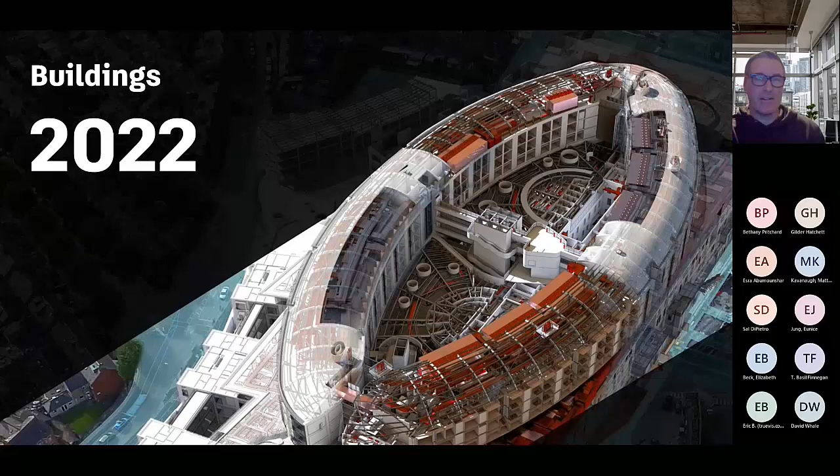How's the lag? Is that okay? I think so, yeah, that was good. That was good on my end.

Okay, so I'll just do a quick who am I. I've actually been in the game for over 25 years. Started CAD back in '96. My student days, there was no Revit, so I did a little bit of work with AutoCAD and our 3ds Max platform. I'm actually originally from New Zealand, where I got to design luxury accommodation up in the North Island.

Most of my career was actually working in the UK, for a company called R&JM Architects. This was an early project I designed, inspired by architect Neil Denari. This is a Sheffield project, a library. I was actually a skateboarder back in my day and subconsciously designed the steps and rails so the local Sheffield skateboarding group could abuse my architecture.

My first foray into building information modeling was on the University of Cambridge. This is a medical research council building we did, heavily serviced, hence why we have these stainless steel shingle clad towers with the extractors housed on the side. When we did this, it was in the early days of Revit. We actually started this one in Autodesk Architectural Desktop. If anybody's used that, I think it's now called AutoCAD Architecture.

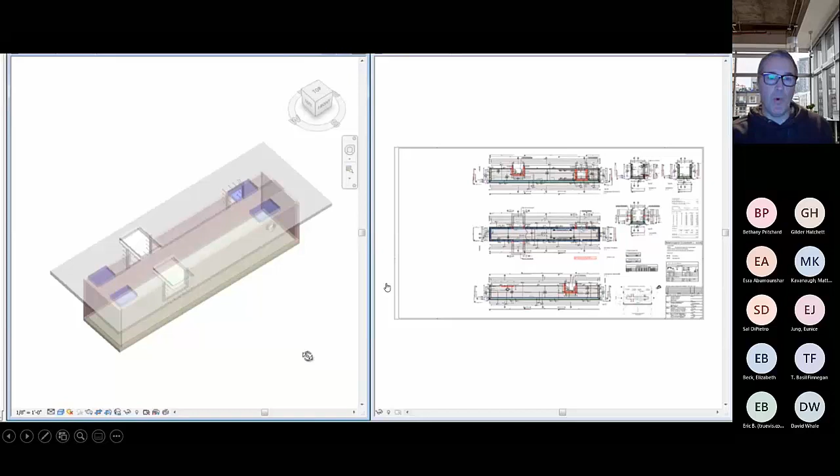What happened when it got to the final construction documentation is the contractor, BAM, rebuilt the whole thing in Revit. This is a quick video just showing the detail because it's a heavily serviced laboratory. All of the components are actually modeled for mechanical and electrical, so they can use that for facilities management.

This video we showed a few years back. This was just showing some of the displaced parts that you can do in Revit to better show the assembly of the laboratory tables here.

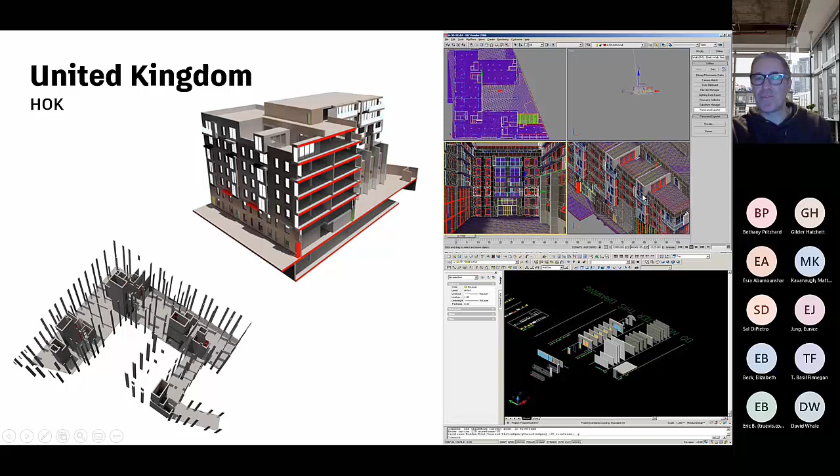I also worked for HOK for a short period of time. One building that I did the conceptual design on was the Baku Flame Towers. It got handed over to another team who developed this in Revit. At the same time, when I was a BIM manager at HOK in London, there was still the crossover between Revit and ADT, and then linking it into the older 3D Studio Viz platform.

Before leaving the UK, I was fortunate enough to work on a design for manufacturing and assembly project. This is a large, complex healthcare project in Brighton, on the south coast of the UK. We worked with Laing O'Rourke contractors where the components here, the precast concrete panels, were actually modeled all in Revit.

This is back in 2010, where we didn't have divided parts or the concrete add-in. We actually hosted these within a curtain wall, and each one of these panels, they're exported as an IFC, and then Laing O'Rourke used them to fabricate these panels for assembly on site.

I'm also very passionate about sustainable design. I've done some competitions in the UK. My claim to fame at Autodesk is I got to design the sample house, so every time you open the product, you'll see the sample house. This is the original design, so a little bit different from the one that ships with the product. But yeah, fortunate enough to be able to be creative.

And I'm a regular speaker at the Autodesk University events. I did a formal one a number of years ago, InfraWorks for Architects. We did like a thing remodeling Sydney, a VR one in 2017. And then the last one before the lockdowns was with Willow, where we were doing some digital twins workflows on Forge.

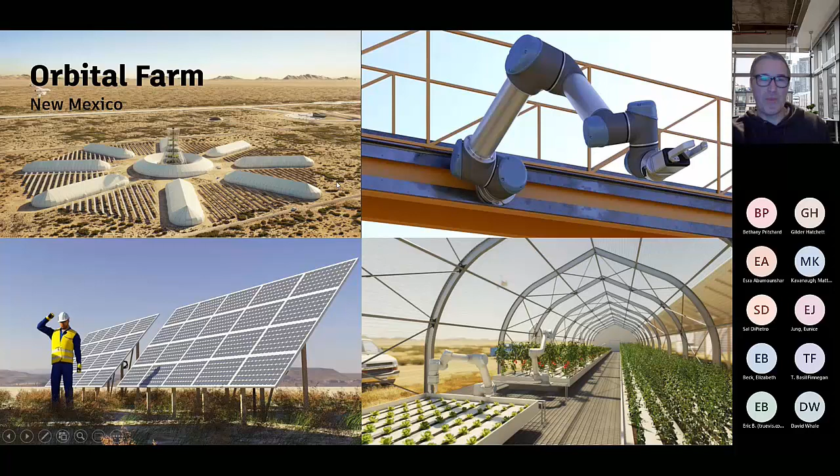Okay, so I won't go into this full presentation, that was just a quick intro. Today's presentation will be on conceptual design, focusing on Formit. If you have any questions, feel free to drop me a note, my email's there.

I decided not to show something that I would typically do. I thought, well, let's try and do something local to you guys. I found this building in Charlottesville, and I thought it would be a cool one to model in Formit. I'll keep this loose, so if you have any questions, please reach out, just feel free to ask. I'll try and jump between the platform, but I want to do the overview first and then come back and show some of the picks and clicks.

One thing I got hit with yesterday was Bing Maps went down and I couldn't fully use the tool. But I wanted to show some of the tools you can use that we've been adding to Formit to create 3D context. This is part of the APIs, the plugins, so you can load in numerous plugins or build your own.

This one that I thought was quite cool allows you to choose a location and build the city. With the tool here in Formit, I'm just going to try and move my controls out of the way. This is always the challenge of doing stuff remotely, as you get the tools in the way of the product.

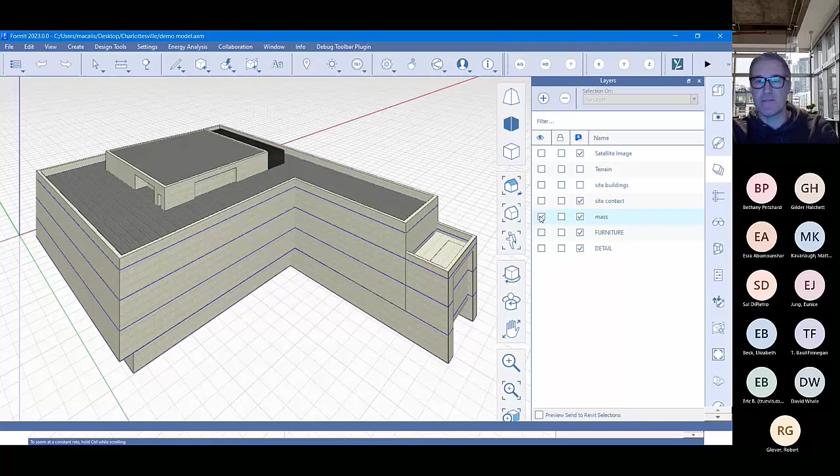So what we have here is, I'll just turn off some bits and pieces. We actually have the site buildings and the satellite image showing up, and let's just turn off the terrain. So this is the satellite image I've pulled down for this particular site, and it's going to be jumping around a little bit on me. I did do this a lot bigger, but I just wanted to reduce it to give me a bit of context.

The tool we have to capture all of this is up here, this is the location setting, powered by Bing Maps. I had a little bit of a challenge yesterday, but basically with this tool, you can pick a location anywhere in the world. This little red dot just shows the location of your site.

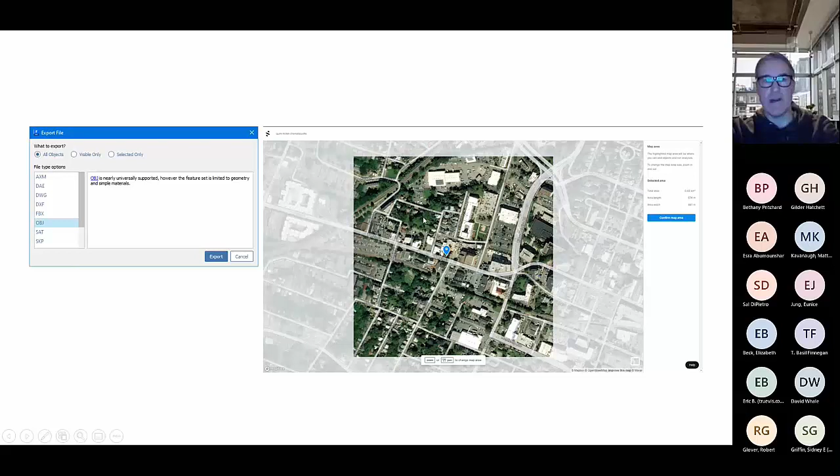So I'm just centering on the site, and you can pull down a lot of info here. One thing to note is that if you do a much larger site, it won't be as detailed or fine-tuned in terms of the aerial overlay. So make sure you're choosing a smaller amount, but you can pull down a lot of information, satellite image and terrain, or you can just set the location only if you don't use that information.

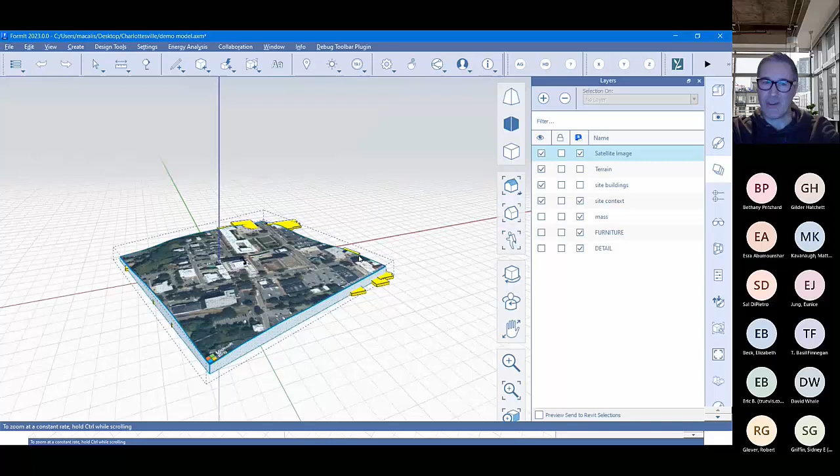What you'll find here is when you turn on the terrain, this is OSM data, so OpenStreetMap's data, which is kind of okay, but it's not really as accurate as what you want to be using. So it does put that automatically on a layer when you're pulling down site information.

The other tool we have here for building the context, as I'm panning down the list, this is the 3D context creator, and you can go up to 1,000 square meters, referencing our northings and eastings, our longitude and latitude. Now I won't do this live, because if I go and do it, it'll take a few minutes, but you can pull down a lot of information here. And here is the data I got from that 1,000 square meter block.

What I actually did was jump into Spacemaker, one of our new platforms, because Bing Maps wasn't working in FormIt yesterday. But I wanted to show that if you're creating sites or want to connect to other platforms, FormIt does export numerous file formats. So if you want to import or export SketchUp files, it will do that.

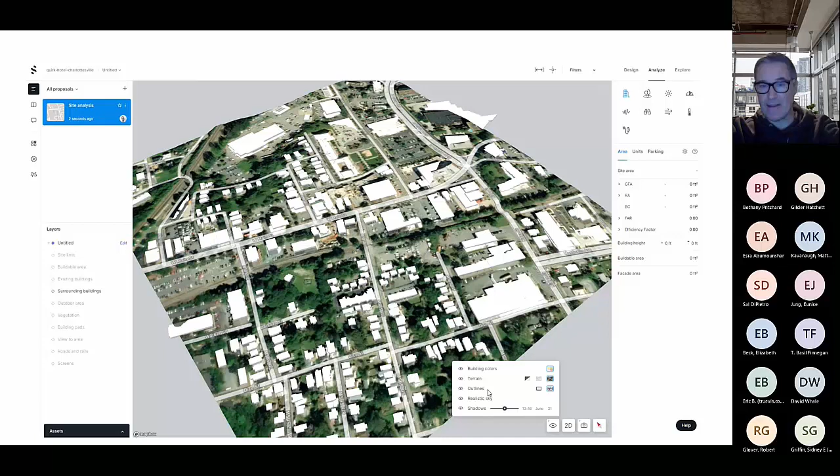OBJ is one of the key ones that works with our new Spacemaker tool. So I did the same thing, created a site in Spacemaker, and went through the process of looking at the OSM data here. This is what it creates for the site: you get street information, the aerial map, OSM data for the building, and aerial information. We're adding more and more features to this tool, like realistic sky and building outlines.

What I was doing here was looking at how I could combine the FormIt data in the Spacemaker model. So this here on the right is actually the FormIt data pulled down from this 3D context creator. It actually did probably a better job than what the Spacemaker tool was pulling down from OSM. This is a whole other session on Spacemaker, which we could do at another time, but at the moment it's geared up for Northern Europe because of its origins out of Norway, out of Oslo.

So it's all about the databases, how you can bring in other data to use in these platforms to create your site context. There are new tools allowing you to optimize the data before bringing it in. What's kind of cool is this FormIt data I'm bringing into Spacemaker actually starts to break down the levels as well. You can set a story height, split the model, simplify the model, crunch some of those vertices. There are tools here to help you optimize the data you're bringing into the Spacemaker platform.

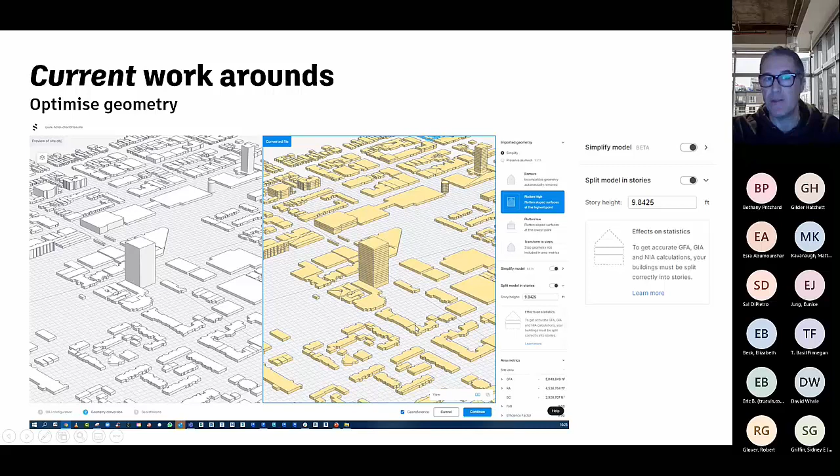Now, one of the challenges we have is aligning those databases, because at the moment we don't have all the world coordinate systems inputted into the program yet. We're going to be accelerating that, but it's just not there yet. For me, being down in Australia, we use the map grid of Australia, and there's a whole northing and easting system to get familiar with. You can find some workarounds to do this.

One of the tools I prefer to use is 3ds Max, which is in the AEC collection. So if you have a collection, one of the workarounds I was looking at is exporting terrain data out of Spacemaker, bringing the FormIt data and the Spacemaker data into 3ds Max, and then aligning the information together in the X, Y, and Z values. These are some workarounds. It can get a little complex, and I don't want to overwhelm anybody.

I think we have a question. I was trying to find the right moment to interrupt you. Yeah.

I just wanted some clarification in terms of the OSM files you were importing through FormIt versus Spacemaker. Does the FormIt 3D create or site generator still extract information from OpenStreetMaps? If so, why is it different on both platforms?

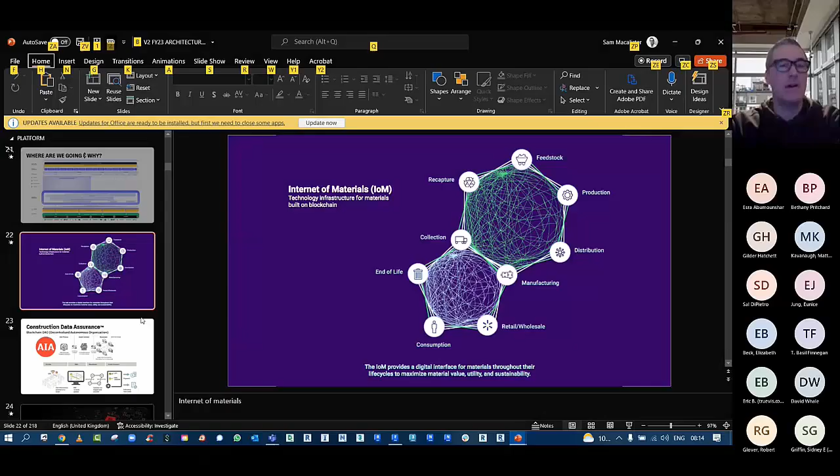We have a connection of FormIt in Lumion, and I didn't have time to prepare this yesterday, but I have done this for a site in Singapore. Lumion has a beta version of an OSM connector to create a site, and this is what you can do in Lumion—you can link FormIt into the Lumion environment for visualization. Their tool does up to 2,000 square meters, so you can bring in a bigger site, but it's reading OSM data. You can see the data here is really sharp; you can't export it out, but their data seems to be better.

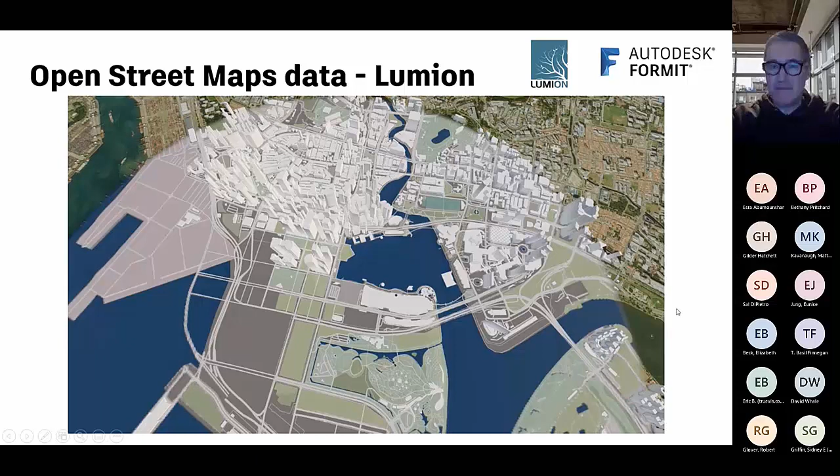I don't know why their data is better, because it says that it is pulling it from OpenStreetMaps. Our tools are pulling it from OpenStreetMaps as well.

Yeah, but I don't have the answer for that, even I'd be curious.

We've been testing early pilots for Autodesk Spacemaker to give feedback. We ended up staying away from OSM and trying to bring in GIS data to help mitigate some of this. That's a challenge because I work in the APAC region, and we don't have the database available for the platform yet since it's still very new to Autodesk. So my workaround was to actually bring in data from another source and load this into Spacemaker.

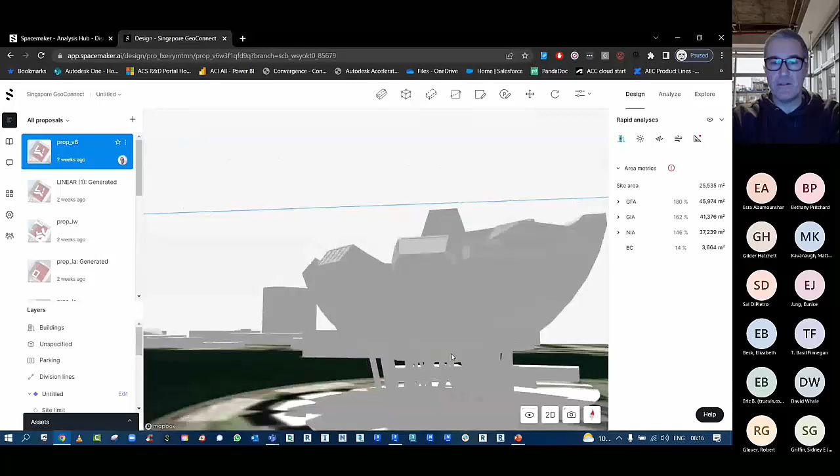So here's Singapore. I've optimized the files a bit because this is a cloud-hosted platform, but you can get a decent amount of detail that's acceptable to use in the platform, and you can start to see different features in real time. This is the tools we have to start designing your buildings, like an LOD type environment where you can manipulate it all. You can test and analyze sun and noise, and there's a wind wake tool.

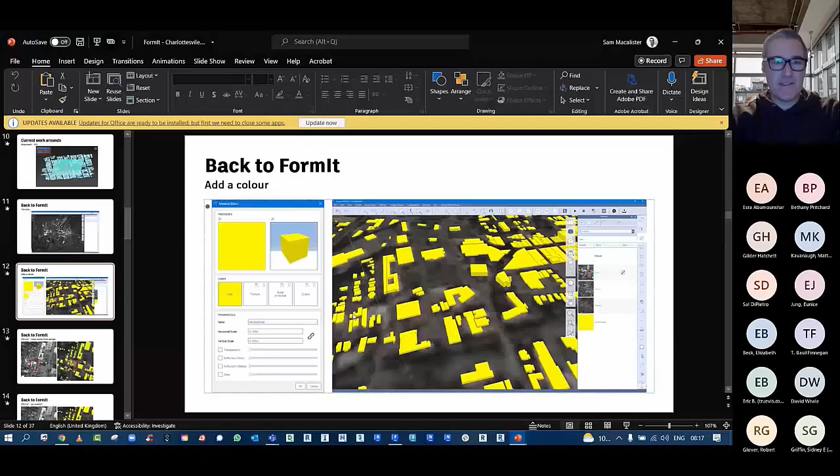This is new, still in beta, and it connects to Revit - I'll maybe show some of that at the end. There's a lot of really cool things happening here, and I've got something set up for Charlottesville as well, where I've been able to bring in assets from Formit to host them in a Spacemaker site. I'll come back to that, but the challenge is always where do you get the data from, how do you align it, and how do you work with real-world coordinates.

Here we have the challenge that Australia is divided up into several different states - not 50, but I think we've got about 6. The coordinate systems change in various states. Over in Western Australia they've just updated it to a 2020 coordinate system, whereas the east coast of Australia is working to what's called a GDA 94 system. So there's a lot of complexity there, and it's always good to work with a surveyor or a civil engineer to understand the right coordinate system for setting up these types of city projects.

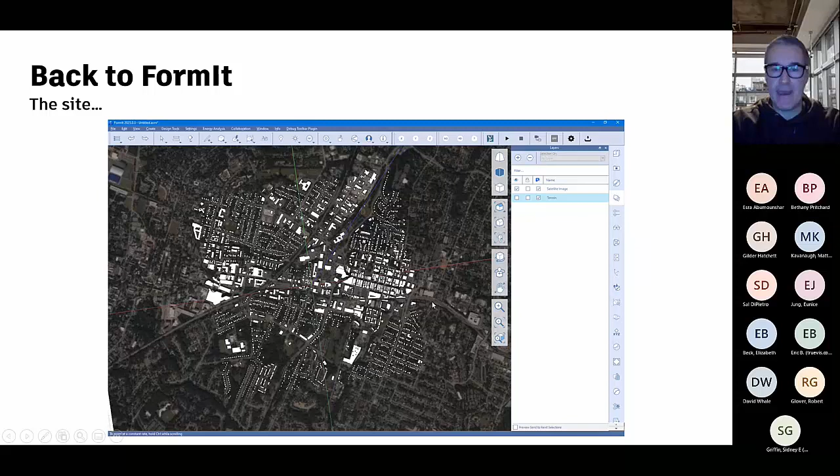This is just what I built in Formit. So back to Formit - I sort of went off into a bit of Spacemaker there, just wanted to show some of the newer tools coming through. You can do up to 1,000 square meters of that site, and then have that big map aerial image in the background. What I try to do is color code everything. Materials are really simple - you just create a color or material you want, bring in your own textures, bump maps, or cutouts for alpha channels, adjust the horizontal or vertical scales like a UVW map, add different types of reflections and gloss to make them look nice and shiny, and apply them to any bit of geometry in the model.

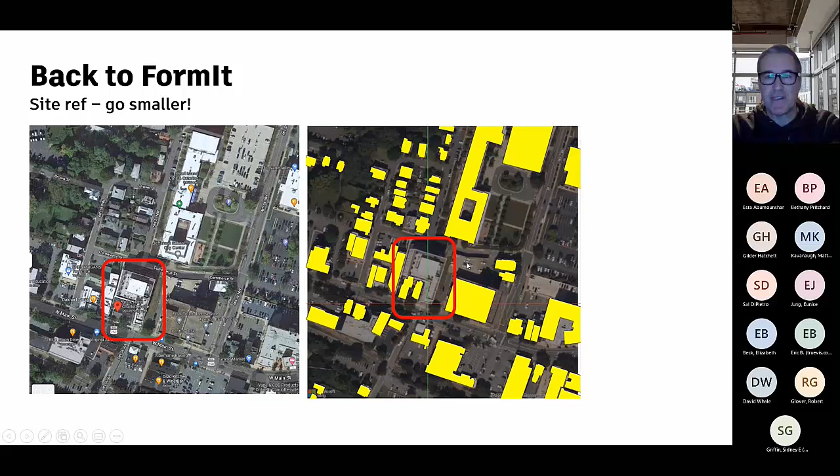What I did note here is if you want a nice crisp image like you would in Google, you don't want to pull down the whole site - you want to get a bit closer with a smaller site, and you'll start to get more fidelity in your aerial image. For this one, this is by an architecture firm - I don't know if anybody from the group works for that company, but I saw this building was new and thought it would be a good example to try and replicate in Formit.

This is some other things you can do to increase the detail on the site. If you're familiar with the Revit kid, he's increasing his YouTube presence with a site called BIM After Dark. Check out this Google Earth 3D trick - he shows how you can use Autodesk Recap Pro to capture site information and export it for use in Revit, Formit, or Spacemaker. It's an interesting workflow - if you've used Recap or photogrammetry or point clouds, photogrammetry is essentially drone footage of a building. It captures photographs and stitches them together, using intelligence to look at the images and triangulate them together, and if it's not too sunny a day, it will create a 3D model for you.

So with Recap Pro, you get Recap Photo. You could take up to, I think it's up to 1,000 photos. There may be a limitation on that, but you can take these photos, you pan around this in Google Earth, you record the screen, the video can be extracted via Adobe Premiere into separate photos, like 400 photos.

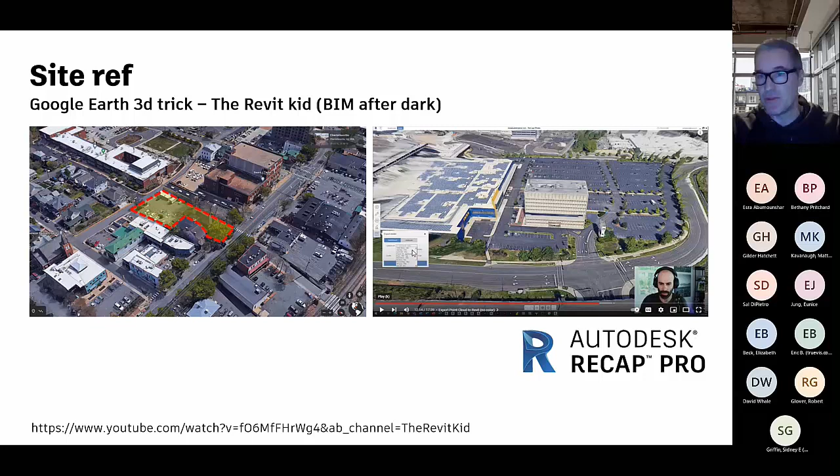You upload them to Recap Pro and it will create a 3D model for you. And I just screen grabbed this one shot. There's numerous different file formats you can export out. So again, if you're wanting to add more detail around the site, this is a really cool video workflow to check out. And again, part of the Autodesk AEC collection, you get Autodesk Recap Pro to do this. The only caveat here is it will consume cloud credits, so just check the consumption of your cloud credits before committing to the conversion.

Okay, so quick start, massing modeling. It's simple, it's very intuitive. This one was just looking at massing up the site and grouping them.

So back in the actual tool here, I'll just move my screen controls out the way a little bit. Typically when you go and model things, you'll want to try and put them on layers. I've been pretty lazy about putting stuff on layers, but it just helps you monitor all the information. Let me just turn off these ones, side buildings.

Typical rule of thumb is you can use these modeling tools up here. I prefer the pencil tool. It is just point and shoot. Oh yeah, and the units, I work in metric, but by default it will work to imperial here.

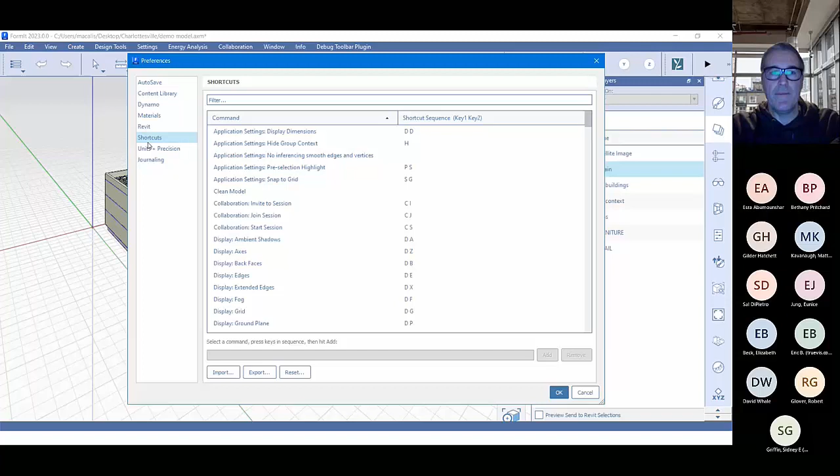In the background, there are more settings for you to look at here. So your shortcuts, if you like to use hotkeys, won't talk about Revit just yet. Material locations, I'm actually pointing my materials to my 3ds Max database, but you could point it to your Revit database.

Dynamo, which we'll get into, you can add like a Dynamo library location. So if you've got someone in your company who uses Dynamo and has a whole lot of scripts you want to use in Formit, you can do that. And then content library as well. You can reuse all your Revit families here to be loaded into Formit as well.

So just a couple of things in the back end. But it is a very intuitive tool. So it's just point and shoot, and you can basically type in the sizes you want. It gives you the little highlight for the XYZ gizmos, and as you go to finish up the command, it will show you it closing. So here we have our

2D component, and then we just extrude it up. And again, I'm working in meters, but it's as simple as that. And then with that selected, I would double click and then hit G to group it. That just helps preventing solids merging into each other and just helps with better management.

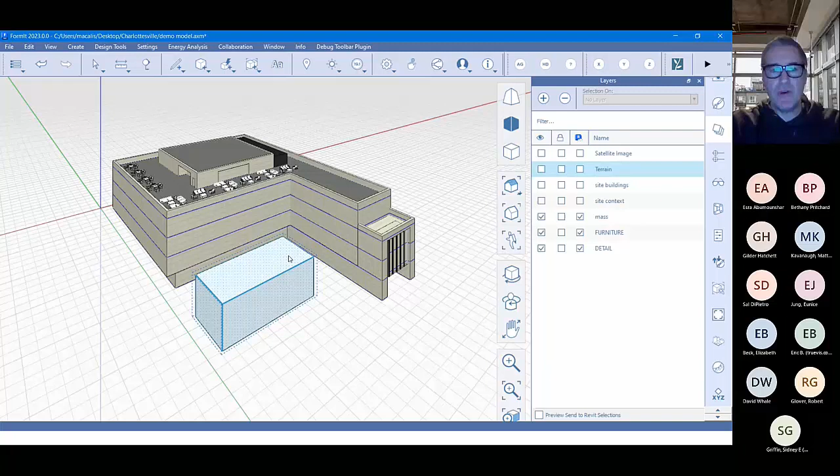So what I have for each one of these is they're just grouped objects, and that just helps me better manage the model. When you go to double click, of course, the group opens up, and you can grab edges and then move them down. And again, I just need to make sure I'm doing this slowly and doing it following the Z axis here.

So maybe I want to slope that down, say 3 meters. I can do that. I can also go and grab points, and I can bring that point up, say 3 meters, if I want to do something a bit more interesting with that shape.

So simple modeling tools. There are a few more advanced modeling tools here. So there's a couple of Boolean and join operations. If you've used sweeps, I think we were talking about landscape architecture here before. If you wanted to do a curb, for example, it could be like a square with a chamfered edge. You could draw a spline and then sweep that curve along the spline.

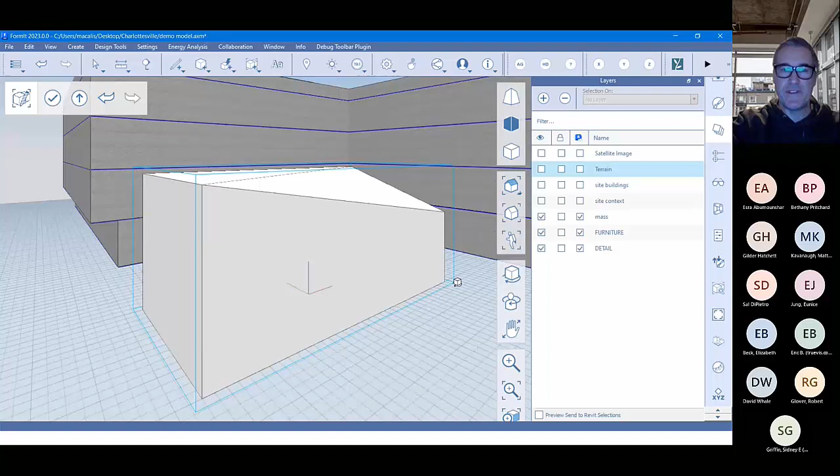Tools here to close up edges. So let's say I've deleted that face, for example. I could go and use this tool, and it will ask me to select the edge to be enclosed. So you're just delineating over the top of that, and then you finish the command, and that will clean that up again. In fact, it's done a little bit of a different type of a junction here. You also have a lofting tool.

So if you ever wanted to do something interesting, like maybe you've got a twisting tower, and the floor plates are twisting, or you want to be more organic, you could loft options, and you can do offsets of solids. So if you want to create internal parts for the walls, you can offset it maybe 200 mil, 300 mil. You can shell objects, and then there's a nice little one for doing fillets if you want to chamfer everything, because there are no corners in real life. So if you want to get really accurate, you can do that.

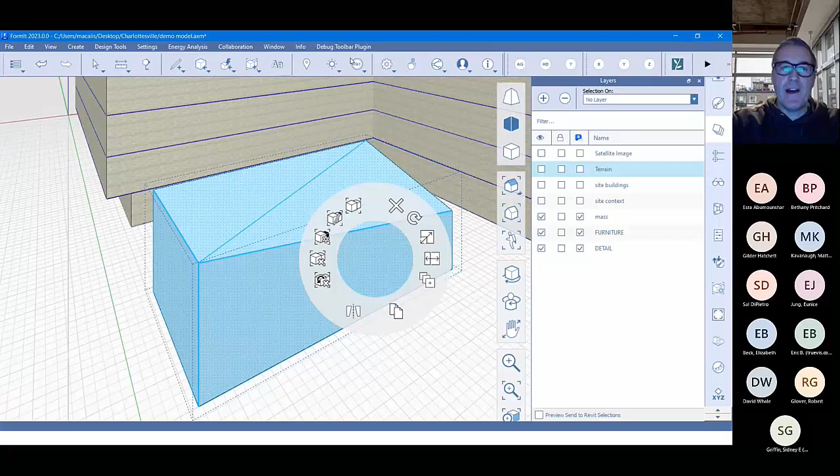Typical tools for grouping. Again, if you right-click, you'll find the tools available here. We also have mirror tools, copy, of course you can go Control-C, Control-V, array, non-uniform scales, rotate, and delete. And a little one we just added, if you want to have 3D text, this is actually a Dynamo tool.

So I could do 3D text on the building here. This is actually a Dynamo script, so it's simple, it's easy to use. So I'll start rugs, and we have some embedded fonts available here. Maybe not all the fonts, but probably some decent amount, and you can use this to increase, decrease, extrude the scripts.

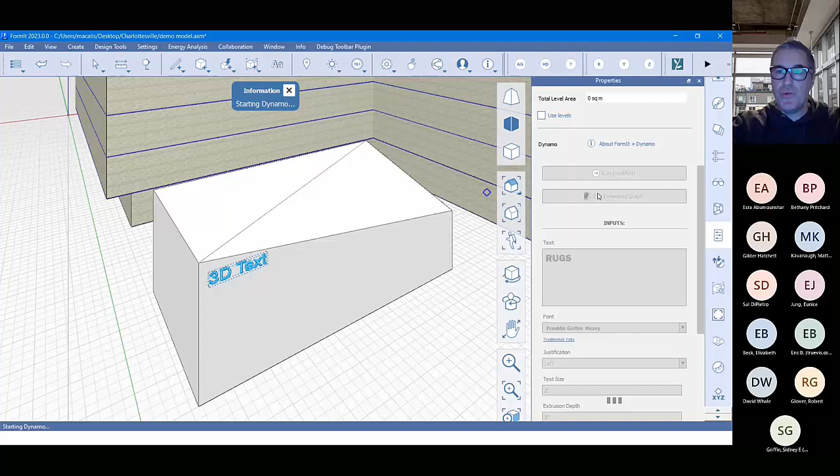If you want to customize the Dynamo scripts, you can also edit the embedded graph, and this will fire up Dynamo. So the whole idea is that we're making this easy for someone to leverage the Dynamo script inside of Formit, but you don't have to be a Dynamo expert.

Here, when we go to the actual script, there's a bit going on, a lot of nodes and wires here. You could work with a partner of Autodesk, or someone in your company doing this a lot of the time, and they could customize these type of scripts for your business. Here we just have the nodes and wires, and then you have the actual 3D text, so you can start to see the actual result of that script working inside of Dynamo.

But I'll move out of Dynamo for a second. So these are all the simple tools. Couple of things to look at.

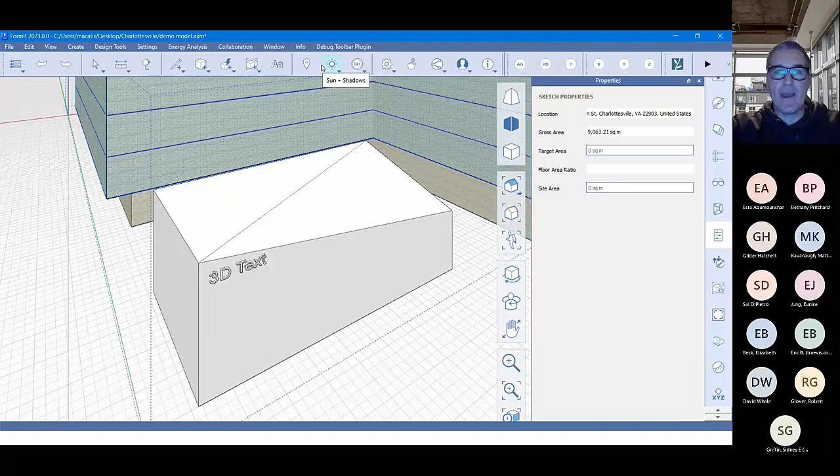We do have a shadow and sun editor, so you can turn on your shadows and your sun editor here and start to see the azimuth and altitude of the sun. So that will be showing for you.

And we do have a solar analysis tool. Now, this is actually leveraging the weather station. Now, this is telling me that this isn't available, and this is because I set this up using Bing Maps yesterday, which wasn't available for me. I think it might have been just down because of my location in the world.

It has an option to look at the range for a certain time of the year. So summertime for you guys, but maybe you want to look at the sun in January, you can do that, or you can look at it for the entire year. So if I just do just for that month, you can choose the entire project if you want, and it will do the entire project, or you can just choose certain faces.

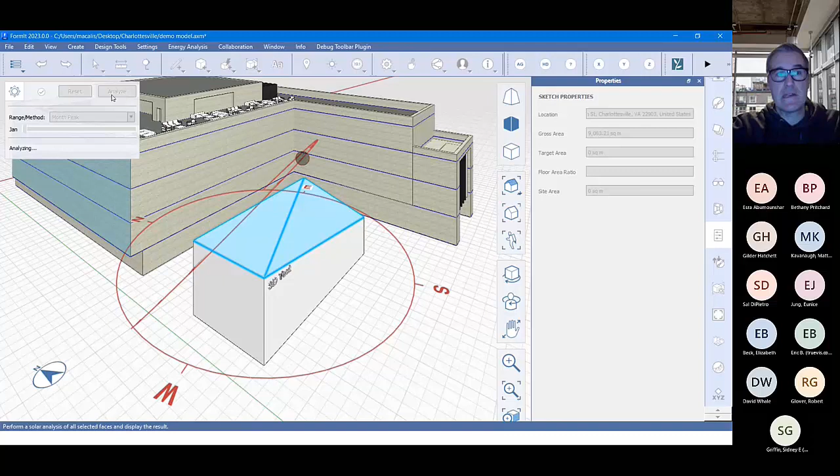So I'll just grab those two and go analyze, and this will now give us some information on the wattage per square meter or per square foot, and it has picked up the location of this being on West Main Street. And when you hover over it, it will start to tell you more information about how much wattage is going to generate, wattage per hour. So nice little simple tools like that to give you some quick feedback on your conceptual model.

And when I go out of that, that is gone. I won't get too much into this one. This is the Insight tool. This is more for doing basic conceptual options with some of the components in the model. This probably works a bit better in Revit. I wouldn't necessarily use this one in Formit. You can test it, but I think the Insight tool works better with the Revit environment.

Okay, I'll just pause. Any questions at the moment?

Okay, so I've gone through basic modeling, some of the tools you can use to get into a bit more detail. And so what I did with modeling up this building is...

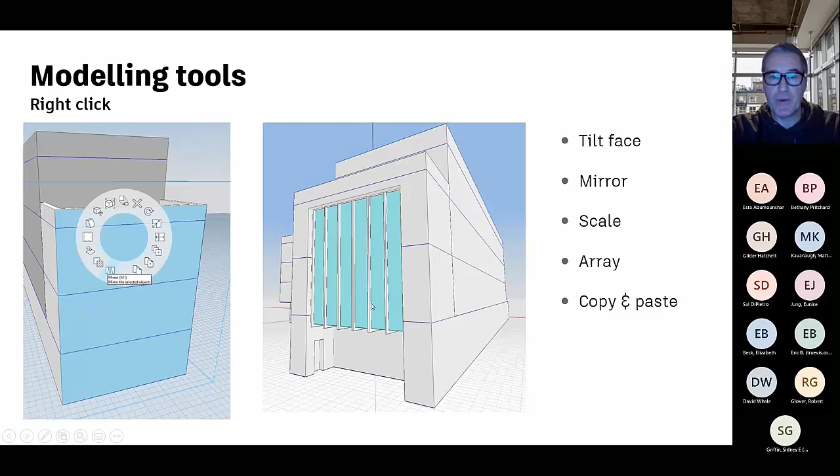I just had one comment in terms of the Dynamo you just showed. I know Dynamo for Formit has a little bit different nodes to push geometry versus Revit.

So whoever is using Dynamo on a Revit side, just keep that in mind. Yes, good point. So when we do go into Dynamo here and use one of these tools, you'll notice when we fire up the Dynamo engine that it will show Formit information. So you can't use the same scripts inside of Formit as you can inside of Revit.

Quick tools we have here. I'll just use the panel grid. So I can select that panel grid. I can start to use some of these inputs.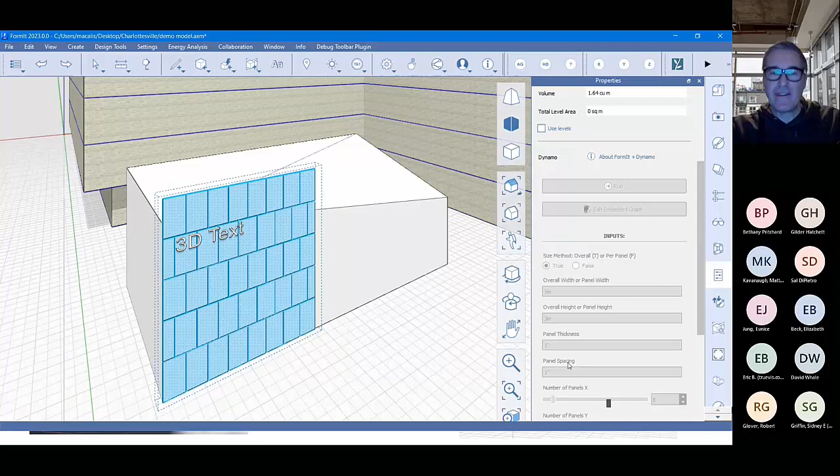One of the things I like here is, although it defaults to imperial, I can change this to meters. So the panel width, if I want these to be say 5 meters, I can type M at the end, and it will acknowledge that this has actually changed, and it will make the adjustments to the panels. I'll probably do something a little funky here because I haven't changed everything, but this is kind of cool - I can use metric and imperial to drive that Dynamo script.

And as mentioned, when we go to run that embedded graph, you'll see that this relates to Formit as opposed to Revit. So it was showing that these are Formit nodes in here. Good point to raise there.

Materials - we work with bump maps and normal maps. If you've ever wanted to use a tool to create a normal map, you can do this in Photoshop, or you can potentially work with a bump map and a cutout as well. It's really simple, just point and shoot.

So even with that panel work here, we've just got our paintbrush. You can work with the material samples. We have numerous ones out of the box, or you can path your own library - I'm actually pathing to my more advanced 3ds Max library.

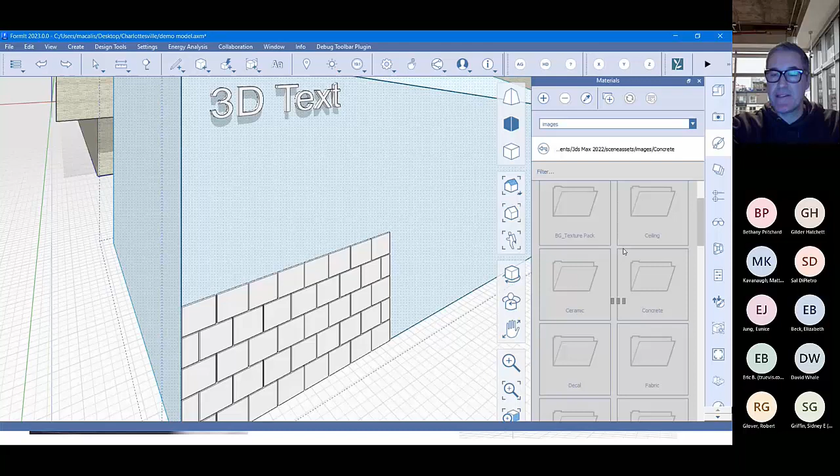And if I go to my concrete image database, I do have a lot of detail here. I'm probably going to be pushing the limits of the tool because these are really high-res images, so maybe I might roll back to the earlier one.

Okay, I'm just going to pause and jump back just so you see what's going on. So I can quickly configure the horizontal vertical scales, the reflections, change the mapping as needed, and then just paint that onto the entire bit of geometry or the material face.

There's also some mirror ones here as well. So painting onto the glass here, I use mirror glass, and there's a rough HDRI background image here - that's why you're seeing a little reflection of trees in a field in the background. Let's see - here it is, so it's loaded up.

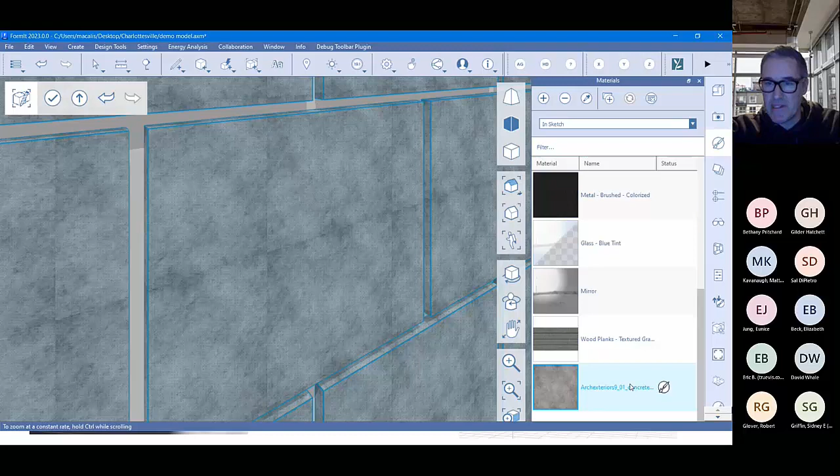So here I can go and just paint that onto that material, and you can see it's coming pretty clean. If I want to make adjustments, I can right click and go edit material, and I want to increase the horizontal vertical scale. The width and height of the panels were like 5x3, so I could go 5 by 3, and you can see it's adjusting in real time, and I can get some nice materials here.

Other things, just so you can see what's happening with this - you can also add more reflection, and as you crank this up, you'll be able to see some of this in the viewport here. This is the HDRI that's actually hidden in the background, reflecting here, but you can see it in the preview.

Also like in Revit, you can lock that as well. So here we have that background - looks like we're on a beach somewhere. So that's just a little nice thing to show real-time reflections for those panels.

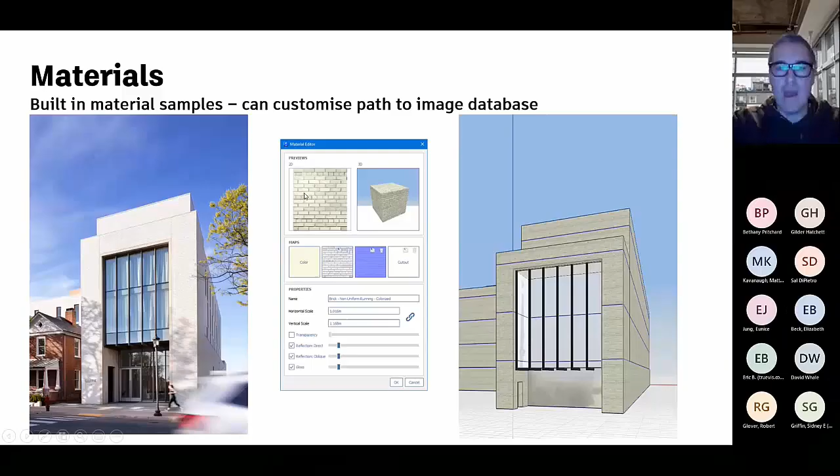The Revit connection - you can bring in your Revit family. So what I have up here is your content library. Now this doesn't necessarily have to be Revit files - you could consider looking at other files. This one, I have it mapped to numerous locations.

I can also map it to the cloud. So I have Autodesk docs here, and I'm going to see if I can start to connect it into BIM 360 here. I haven't got this one mapped just yet, but what I have here within my libraries is the ability to drag and drop in Revit files.

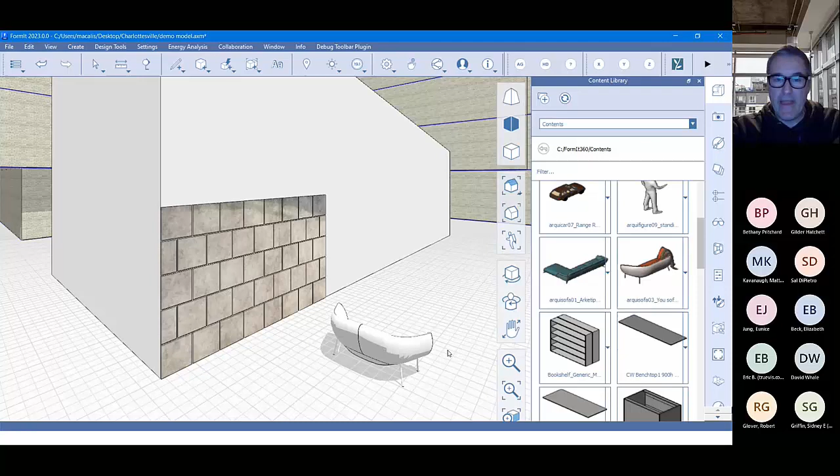Now, some of them, depending on how they were made, will show in different ways. This one's from a company called Arketipo, so it looks really good in Revit, but when you bring it into Formit, it drops down to the coarse level of detail. If I want to bring in something like a kitchen, I can bring in this Fisher and Paykel oven, and that detail is available.

Now, when it does clip like this, just go to perspective views. Okay, so I can't get too close, but you can see there's a lot of detail in this model. Now, it's not a family in the sense that it's going to have all the information like a typical RFA. It's a bit of geometry, but it's a way to reuse your Revit families here, and these can be edited should you want to.

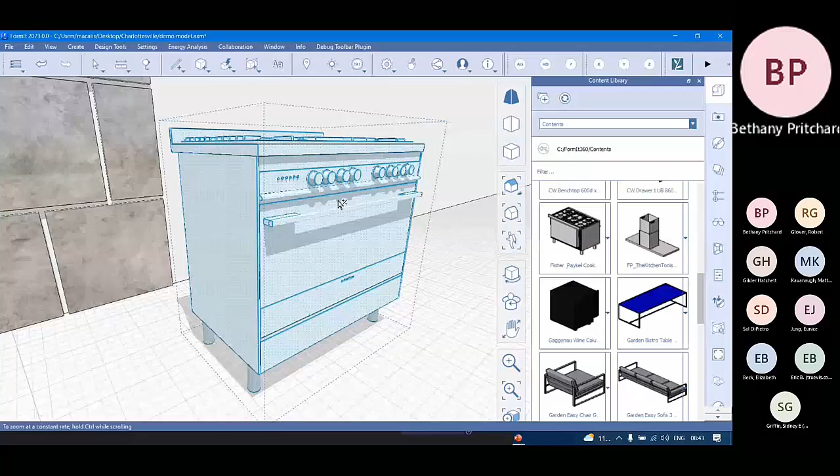But it doesn't have the same sort of depth as, say, a typical Revit family. So you can manipulate this if you want to, and I'll just pull that out. That can all be done, but it is just a bit of geometry, so it's not going to be a Revit family in the same sense as a Revit family. And when you go back into Revit, this won't convert back into an RFA.

I'm wondering about that family, where you're saying when you go back to Revit, it can be converted back to an RFA. But what if there's a modification? Because I'm trying to think this through. No, so...

It doesn't convert back. It is reusing the Revit database, the Revit families for Formit, but when you bring it back into Revit, it doesn't convert back into an RFA.

Okay, so it's not really the same family — if you loaded the same family into Formit and into Revit, it wouldn't have the same characteristics, it just converts. Okay, yeah, so probably the thing to note here...

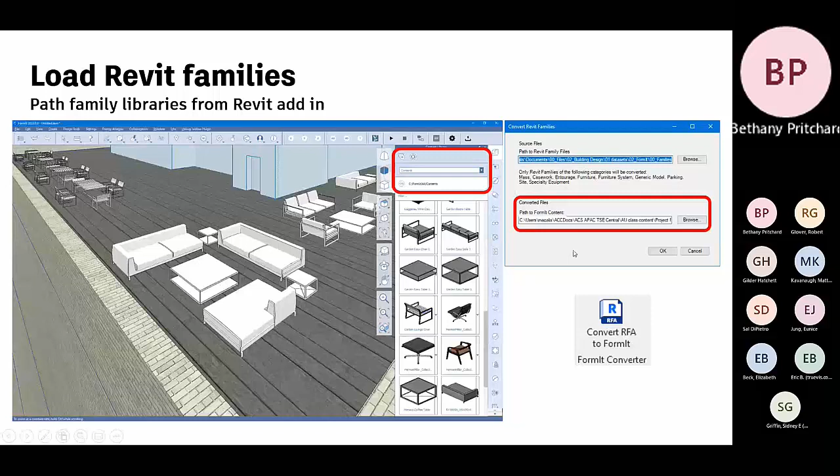Is you want to be modeling in Formit to a basic level of detail and then converting and developing in Revit. So just with Revit 2023, it's bringing through some data, but it's not going to bring through everything. It's not going to automatically convert everything just because of the way the two tools work.

I'll just cover a couple of things before going into Revit. For any of us architects who like to have things look a certain way, we do have visual styles in the tool. And this is just in Revit 2022, 2023 — we have the ability to bring in the AXM file as an import. In 2023, you can link it. In 2022, you can import it.

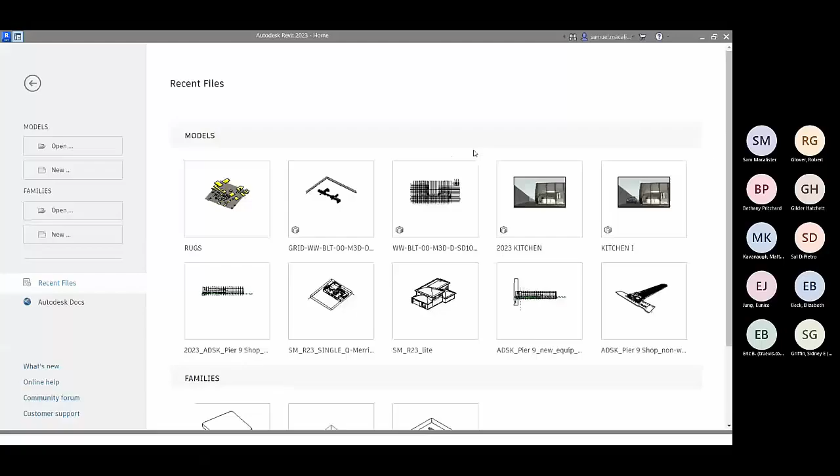So what we have here in Revit, this is just the site. I won't go through the process of doing it all instantly — just don't want to suck up too much time. But here I have a link of that Formit model coming into Revit. So it is an AXM file format, but it's linked like a CAD file format. There is the ability to send that back or edit it back in Formit if you want to.

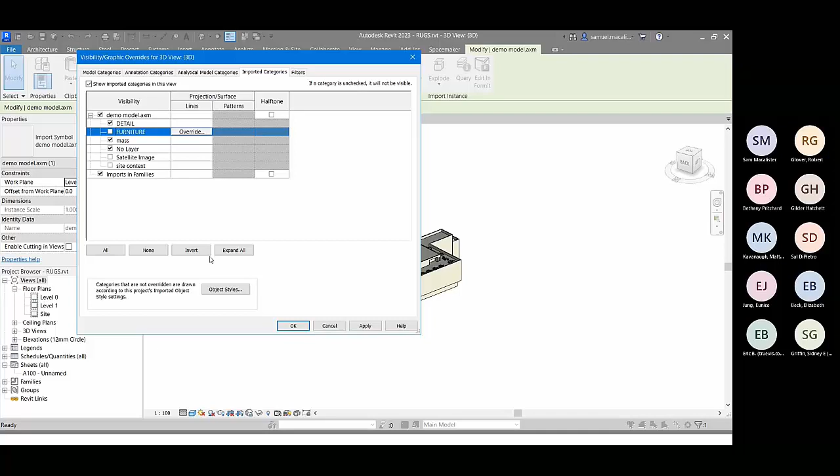So you could go back and edit that. Here it's pinned. You can query some of the layers. And again, I've done a very basic job of creating layers here, but there is some information here. When you go to your visibility graphics and go to imported categories, this information is available here as well. So if I want to turn off some of that site information, I can do that, and the furniture, I can do that as well.

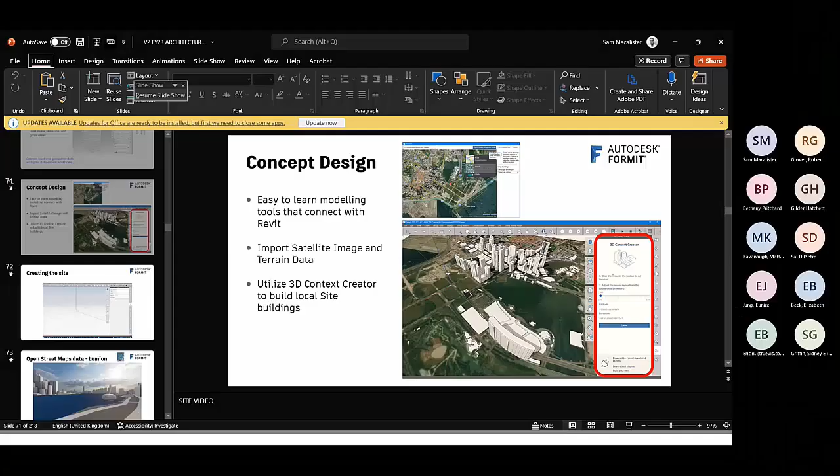And now I have what would be the basic of a massing model to start working on, and you can see some levels. The levels haven't come through in this one. In the 2022 version, you can bring it through with the levels, but because it's 2023, it's a little bit new — it's not bringing through the levels in this instance. But in this part here, just to show you a quick demo where it does have some levels.

For anybody who's an Enscape user, we don't have a plugin for Enscape, but we do have Lumion. This is just a quick example of a Formit model linked into Lumion using one of their demo sites. I can get some quite good results without having to do too much work, and again it's all going to depend on the power of your PC, your graphics card, your CPU.

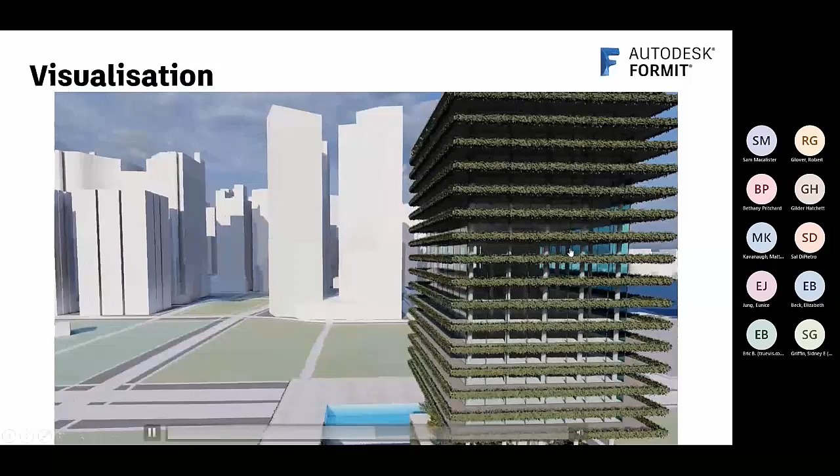A slightly larger model here, this one looking at that city context. This was a tower in Singapore with a lot of foliage. If you've ever used trees and planting in a model, it can be really taxing on the processing power of your PC, but this is just looking at linking that Formit model into Lumion and showing it within context.

The one we have here for the levels - this is the imported one in Revit 2022, and my levels do come through. It's just the new 2023 one, because it's linked, that's not doing that.

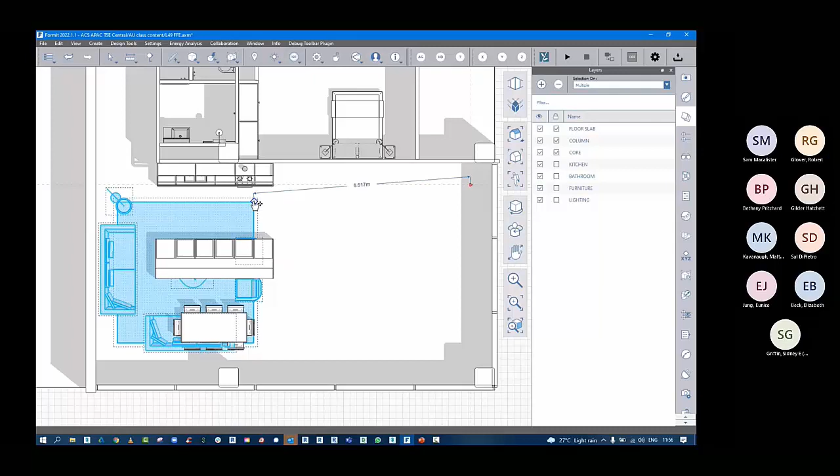A workflow that was of interest to one of my customers in this part of the world was having a connection between Formit and Revit, to have different teams collaborating within a Revit model but have the Formit team doing their own thing. This one is the Formit environment where we have, say, someone doing a fit-out of an apartment - an interior designer - maybe they don't want to be using Revit, it's not really needed for what they're doing. They can be working in Formit with the Revit families, and that design can be linked into the shell and core.

So this is level 49 of an apartment building in Singapore. This can be linked in at level 49, and that can be part of the shell and core of the Revit model. So it's a collaborative design workflow - not a fully connected BIM workflow, because the Formit data is Formit data and Revit data is Revit data, but that's one way you might want to consider using the tool.

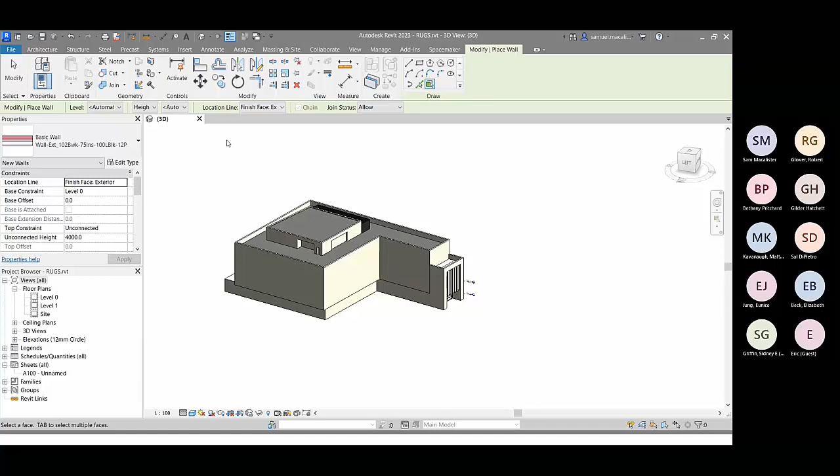Here, back in Revit, it is a massing object. Typically if you want to convert these into Revit information, you would use the mass by face tool. It looks like here I might need to make some adjustments to actually leverage that tool in the new 2023, so I might need to import it and then start to use that tool. So that's where it's at in terms of bringing it across into Revit and connecting back - but it is still bringing in a massing model as opposed to a detailed model.

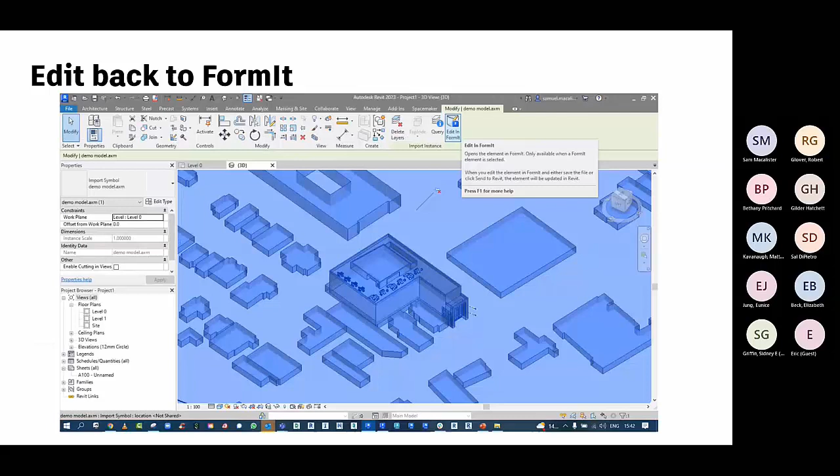I'll come back to that in a second and show you some of the new stuff you can do with the Spacemaker platform, which is really impressive. Other things you can do - the data doesn't have to be used just for Revit. You can use it as an FBX, OBJ, DAE, or SAT.

In this instance, I'm actually bringing it into Spacemaker. I can bring that in, and I can even locate it by its northings and eastings - a little bit of tweaking here. I know that's not the coordinate system for Virginia, but I've moved it to the correct northings, eastings, and vertical Z placement. We can bring it into the site, delete some of the information that's on the site, and then place that building in context.

This is still very, very new, and for anybody wanting to use Spacemaker, it's available for a 30-day trial. It's not fully rolled out in America yet - it will be soon, it's just not fully there.

With that Formit data, I can now start to assign it to a building type. So that particular level could be a living unit, or I could put on a core, or add it to retail or residential. There's a lot of really interesting things happening with the connection between our conceptual design tool Formit and our new cloud-hosted platform Spacemaker.

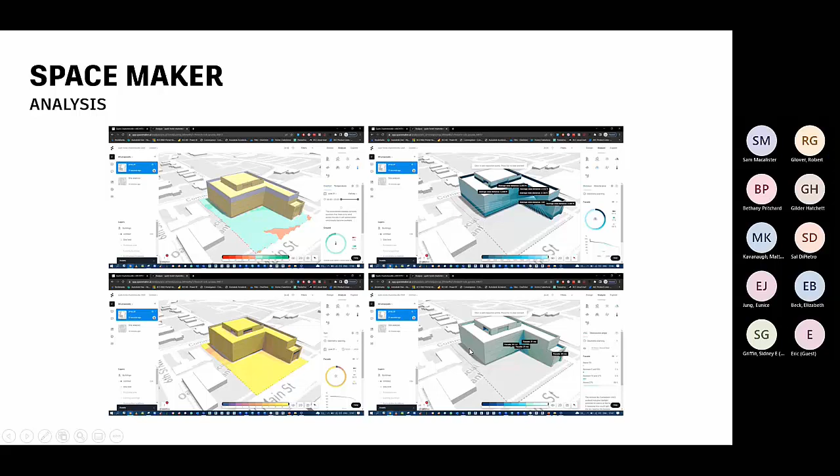There's analysis as well - tools for doing noise analysis, daylight analysis. There's a little microclimate tool here if you want to measure the heat within a courtyard in a hot part of the day. There's a view analysis one, which we'll get into in a second. There's even a wind wake analysis, and there's also a connection to send that data into Revit, which I'll try and show towards the end.

Just checking how we're doing for time - I know I've probably gone a little bit long.

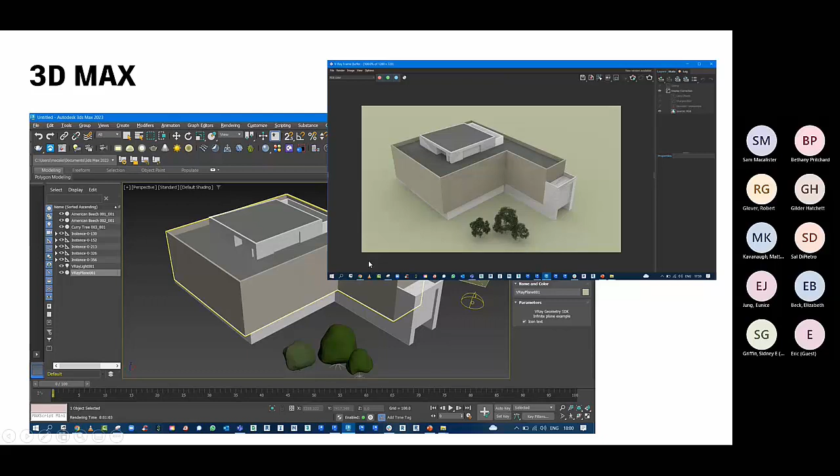This data can also go into 3ds Max, and you can reuse that data. The materials from Formit have come through, and I was just using the V-Ray engine to put some trees in and start adding context. I know most people using Revit will be using Enscape, Twinmotion, or Lumion. I'm from the old school days, I still love 3ds Max, but you can still re-leverage that data. So let's jump into this and show how we can start to do a bit more with the newer conceptual design tools.

Any last questions on Formit before I load up some stuff here?

I'm not sure if you were going to get to this, but it would be great to see information brought into Revit, manipulated in Revit, pushed back into Formit, and that back and forth. That's what I've heard Formit is able to do. I'm not sure if you have time to do that, or if you have to import it instead of linking it.

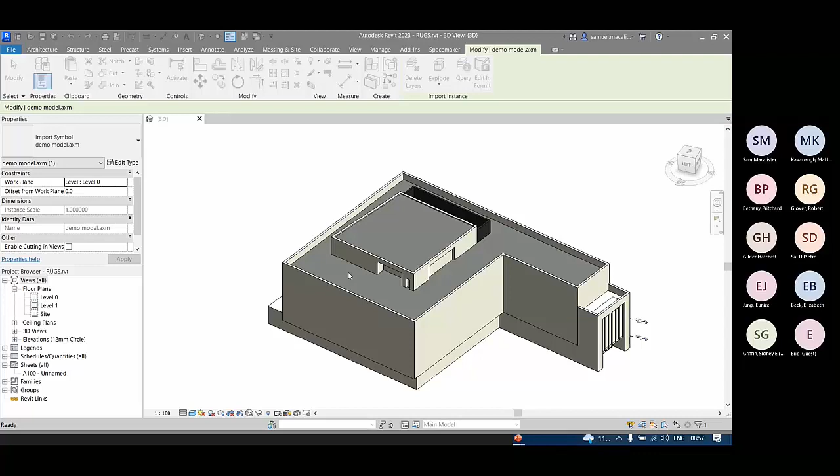From what I've seen, it needs to be imported. Whenever we bring out new tools, not everything is fine-tuned. If I just go and do a new project using an architectural template, the linking option doesn't allow me to do anything, but if I go to Insert — and I know we should not be importing, we should always link data — if I do an import of an AXM file, this one now gives me the option to bring in the levels from Formit, and I've done shared coordinates.

I'll touch on shared coordinates in the new tool in a second. Now when we go to our 3D view, it's actually brought in the levels I created inside Formit, whereas the previous linked one just had the default Revit views, and I could maximize all of these out, etc.

Now with this one, if I want to do more with it, what you want to be doing is using wall by face, but at the moment it's not giving me the option to select that massing object. So I'll turn off the detail of the furniture.

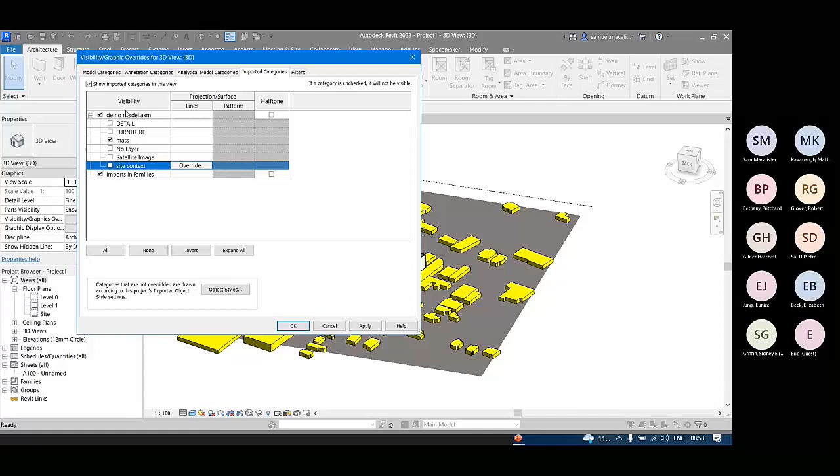What you need to do here — I'm going to do a partial explode, and this can sometimes be messy. Okay, that's done it. The partial explode has broken that down a little, and I would then go to use wall by face, but it doesn't seem to be liking it. You might need to go to full explode. No — so yeah, it isn't a perfect workflow, especially with certain types of geometry.

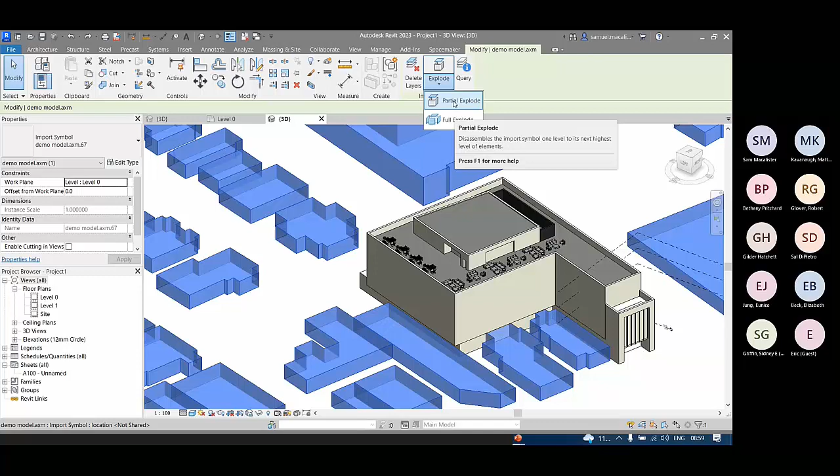Perhaps with simpler massing geometry it might work a bit better, but the way it reads this, it's not liking it. So the connection of bringing data from Formit isn't going to be seamless in terms of having a model that's 100% ready to work in Revit. I'd keep it very, very basic — that's always going to be the challenge.

Because in Formit or a tool like SketchUp, we want to be able to model something like this — my goal was to have something like this as a conceptual design model. But to reuse this type of data inside Revit, as you can see, it's not going to work perfectly. You probably need to consider how detailed you model it before bringing it in and using wall by face.

What I will show, though, is a much better tool for doing this. I'm just going to close out this project and do a whole new architectural template to show you where we're going now with these new tools, and what it actually converts to automatically without having to do wall by mass by face.

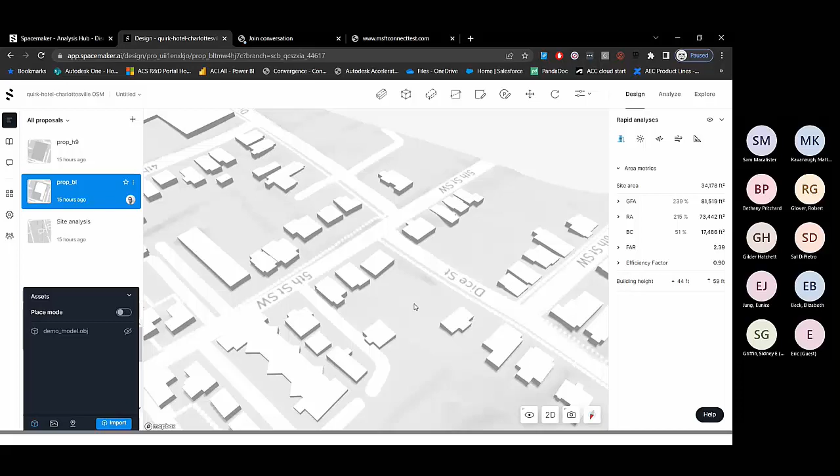So here inside the new Spacemaker tool, you can bring in different assets as needed. I did bring in the Formit model, and I have that data available in the proposals. Where is it on the site? Here it is — I've got to get used to my different keys for this tool.

You actually have to use the shift key and the right click button to pan, as opposed to the mouse.

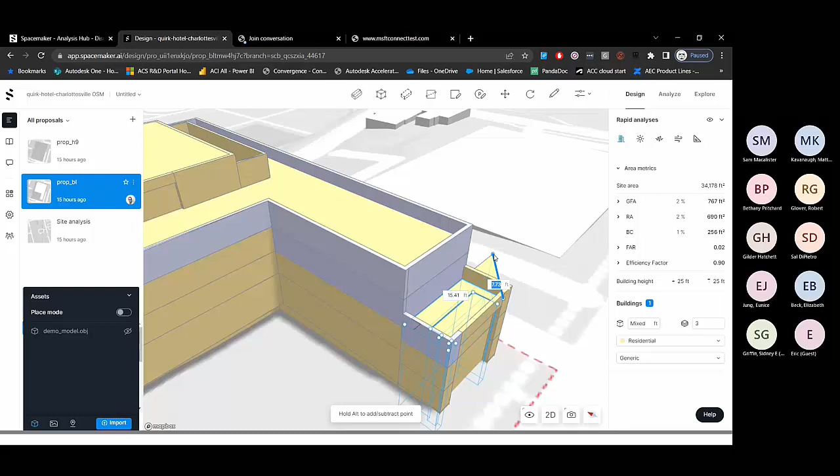Here's my Formit model inside of Spacemaker, and you can see how it has come into the platform. There are some things you can start to do with this. Again, this is very early days, but you could start to customize these elements. Now, this might be a little bit too detailed for Spacemaker, but I can use that information and potentially manipulate it if I wanted to.

Now, I won't do that. I want to just show some of the newer tools. So I've got a new proposal here to create a new proposal plus. With this new proposal, when I fire that up, it just gives me a clean site here.

Some of the things I've done in the background under the layers here is you can go to the edit tool and set up more intelligent information for your site constraints. There's things like bringing in your own terrain, should you want to. So here, this is the OSM data, and I don't know how hilly this part of the site is, but maybe it's not as hilly as that. OSM data is like the DEM data. You can bring in your own terrain file. The other workaround I've been looking at is exporting the terrain as an OBJ and then aligning it with proper site topography inside of 3ds Max, should you want to do that.

Other things you can do is set up your existing buildings. So here's our existing buildings. Oh, this one is defaulted to surrounding buildings. There's a bit more information here - you can start to drive some of the tools to configure that existing building information.

You can add roads. So if I want to go and do West Main Street here, just go into 2D - this would be for setting up tools for doing the noise analysis. So I'll just draw a basic line down here for West Main Street, hit return, and now I can give it a name, and the speed limit - I don't know, 30 miles an hour, 35 miles an hour. And then daily traffic, maybe there's 2,000 vehicles that will go down there.

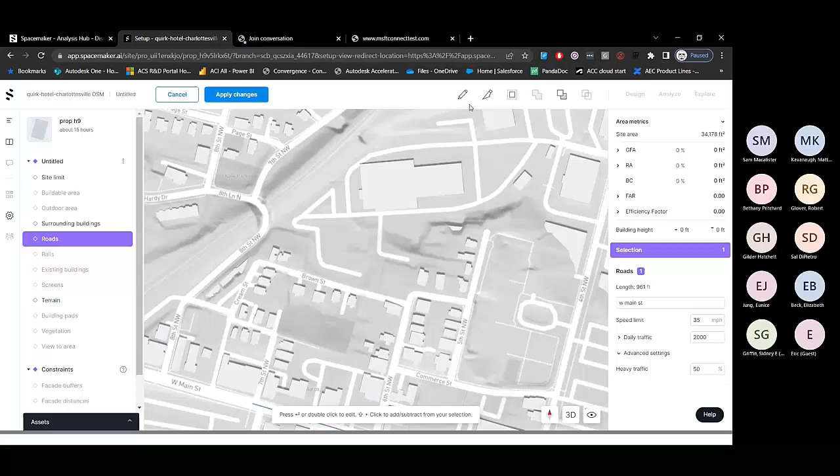And then we also can say there's a construction site going on, so we're going to be looking at 50% heavy traffic. All of that can be set up, and this could impact maybe the acoustics that you want to specify - for the facade of that building, you might need triple glazing if it's a library or something. So all of this can be used, and you can apply those changes once you finish them all. There's buildable area, which we can have, and I've also set up a site limit here.

There are other simple things you could do for vegetation or view to an area, and I'll do a view to an area set up here. So maybe down here there's like a monument. One of the key things when I was designing in London was you would always be designing so the buildings had views to St. Paul's. So maybe there's a particular building here which you have to maintain a view to. I can go and set that up as a view to an area. Could be a park, could be water - you can color code it.

This can basically help with the AI part of this tool for designing building options on the site. There's numerous things you can do here - I won't get into them all right now, but it's pretty powerful. I will apply the changes, and I'm just going to do it to the current scenario. So roads and rails, view to area, apply - or I could do it as a whole new scenario.

Maybe you're doing a university campus and you're doing several different options, or several different people are working on that project. You can all collaborate in this as well. So you can see here, this is me working on this proposal, but I can invite other people to be working on proposals.

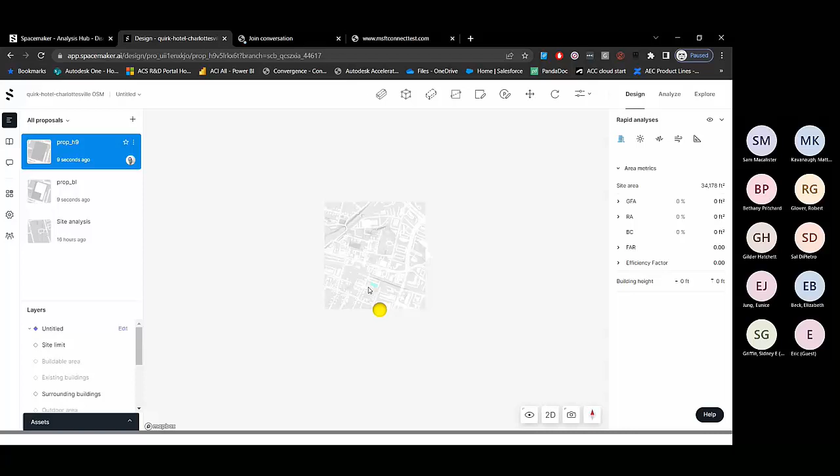Now my internet's working a bit better. You can see here we have some more info for our setup of our site: our main street for noise analysis with the road marker, our view to an area, and then our site limits here.

Now, simple tools here for starting to design your buildings, and there's even a parking tool.

The AI component, though, is under Explore here on the right, and this is where the artificial intelligence component of Spacemaker comes into play. This will allow you to do height studies, site studies. And what I want to do for the site study is leverage all these different layout types.

See what will give me the most amount of units on the site. So at the moment this is fixed, but maybe I want it varied. I want a variety of stories, so maybe 3 to 4 to 8. And then you could set it up so they're maximized for daylight, sunlight, or views.

I'm going to choose views, because I want to see how many of my apartments or hotel rooms for this particular site are going to get views to that particular monument that we created.

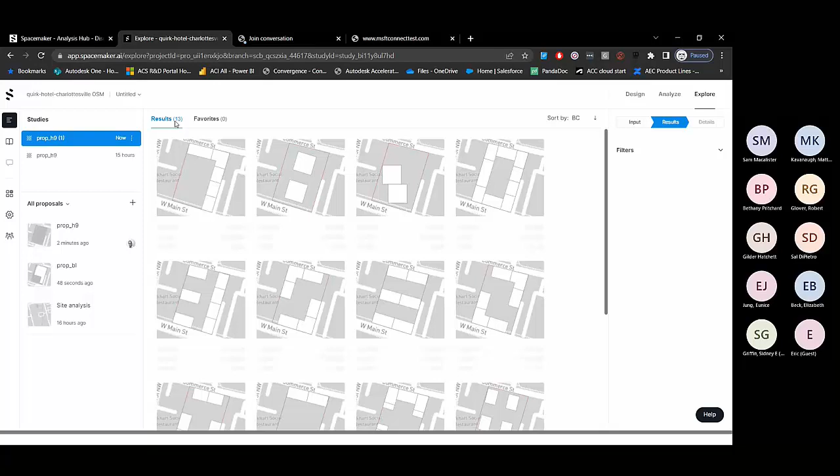So I'll go generate, and this will now go and start to calculate all the different options based on the criteria that we set: the ratio of different heights, the views to that monument. Usually within a minute it will produce a number of results. So it's got 13 different options here.

We can also filter here by what we want to see in terms of the ratios, number of buildings. Maybe I'm a developer and I want to get in the most amount of buildings here. You can see for this one we're getting a certain amount of square footage for these different options.

We can choose the one that is going to give us the most bang for buck, or as an architect, I might want to choose something a bit more interesting. So I might like this one, for example.

I can, of course, make these my favorites. I can also use it as input, or I can add it to the proposal list. I'm going to add it to my proposal list.

And now I have a new design generated for me on the site. So when I go back to the design tool, it will flip back into 3D, and we're going to see more information about the building.

Based on the criteria that we set, all of these spaces should have views. So when we look at the Analyze tool...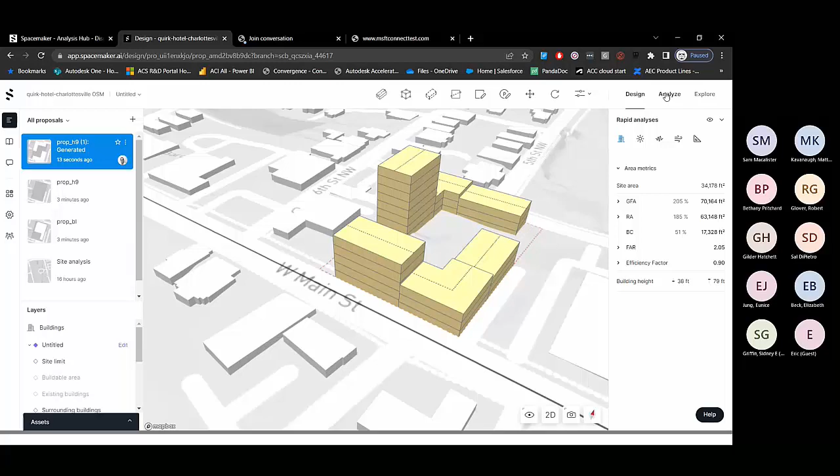We have some really fast tools to do analysis for sun, for daylight, for noise, and for views. There's also a little microclimate one here as well.

This one here is for wind. This one isn't too bad, it's going to do it in 30 minutes. If you've ever done computational fluid dynamics, sometimes that could take days. This is going to be doing it in 30 minutes, incredibly fast.

If you do want to know more on this, we have more data about how we do the analysis for these tools. You can check that out on our Spacemaker analysis site, which is here. So we have a lot of information about how we actually calculate all of this.

This one, you'll see, has already gone and done the sun calculations, and some of our teams are providing little helpful updates here on how you can run this and get the results, and then bring in your own assets. You'll see here there are certain parts of the building that are only getting maybe 1 to 2 hours.

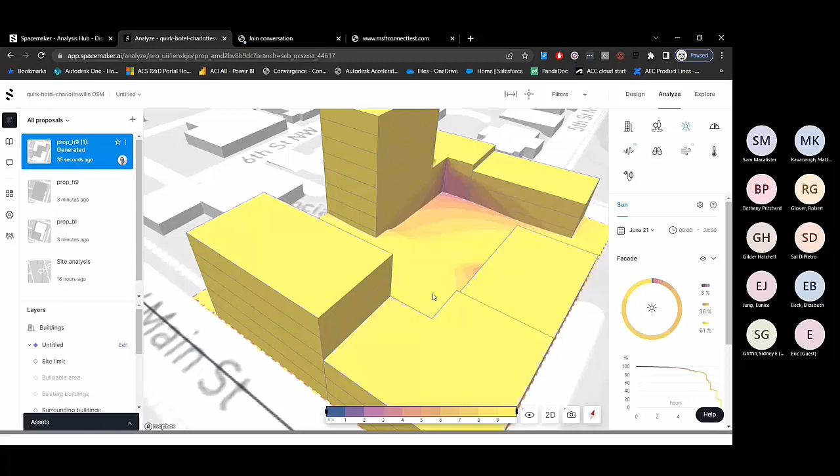So maybe we need to rethink the light coming into these units, or it might be more amenity that we'd be putting down in those parts. Here again, this is something to consider, a gloomy courtyard or ground floor building. So all of this can be calculated incredibly fast.

And then the view one, which we actually set this up for. So again, this one is looking at the distance. We've got 328 feet from some of these units here.

Now we can click on inspecting that and actually see where those views are going. So these ones maybe aren't that great, but this one is giving us quite a lot of views.

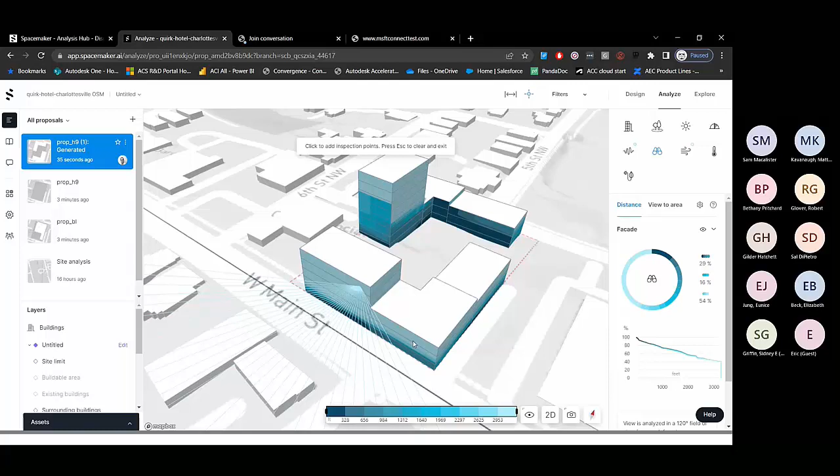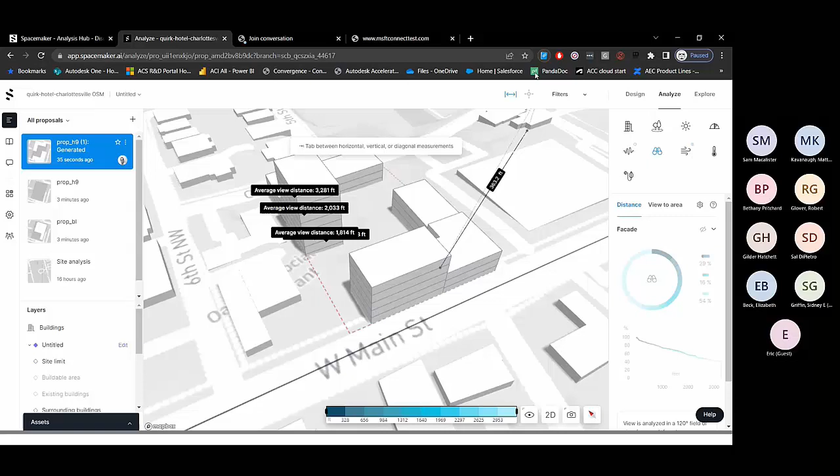And the more focal areas that we want to set up, like to parks or to water, it will start to give us more feedback here. So there's some really cool tools that we have that you can start to use to do analysis of your building.

Back to design, the connection into Revit. I know I tried to show FormIt working there, but it doesn't necessarily work with the detailed model that I have. With this one, you can do a lot more.

One thing I want to do before taking this into Revit is select the entire building unit here. For this one, I'm just going to focus on one for now. I want to make some adjustments. This is the floor-to-floor height, 9.8 feet. The width is 40 - maybe we want to drop that down to say 30.

We can do that and it'll instantly update. We can also look at the section length - this is the length of how it's breaking up each one of the units. That's at 52 feet. We could reduce that, and you can see it's starting to break up the units a little bit more. Maybe 20 feet is a little too tight, so I'll just leave that at 40. You can do that and get real-time feedback on how that's working. I did set it to mixed, so I'll leave that as is.

That was part of the Explore tool for AI. I can also manage how I want this to be - it could be commercial, which will show up as purple, or residential. We can also convert this to a polygon building. Once we have these, we can do a little bit more with it. We can also go into the back end of managing functions.

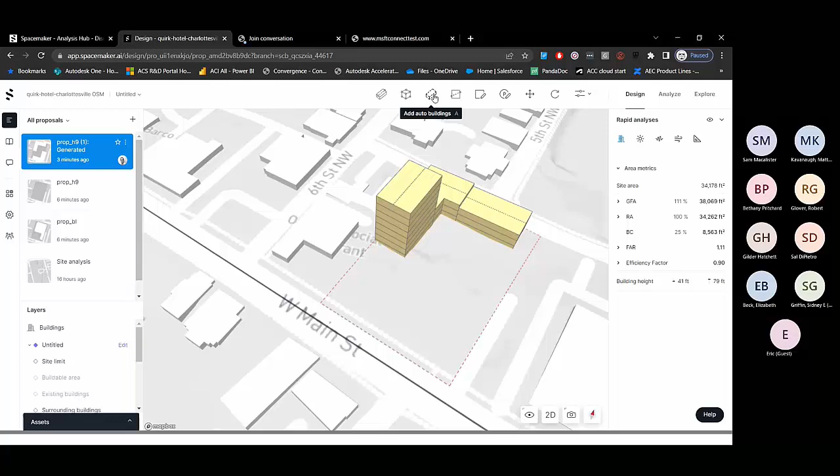All right, I'm going to do the auto building tool here. So with the auto building tool... no, it is not liking me today. Okay, let me just try one more. So let me just try something a little different here, and I'll drop into another project just to show this working, because it might have been the way I just set this up.

So here I have an example I did just recently for Auckland, New Zealand, when I was over there, and we picked a certain location down by the water. Again, it was OSM data, but we were able to get some okay results with that data. You can actually flatten this out - it's quite hilly as shown here.

What I want to do is show you, using the auto building tool, how to convert this into units. So this one, for example, I want to make it into units like this. Using these tools, I can go to set custom unit mix, and this will start to look at the unit distribution. 40 square meters is way too small - we want to be a bit more generous, so maybe 40% for 1-bed units, 0 for 2-bed units, and this could be 60% for 3-bed units. I'll generate that, and this will now go and break that down into ratios.

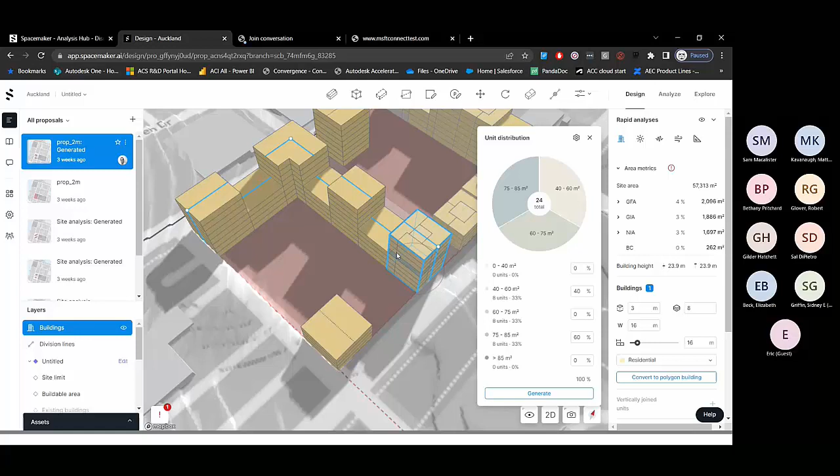So you can see I'm getting 24 units on this 7-8 story tower, and here's the ratio it's giving me. With that, I can also go to display, so it will color code the unit sizes, and with those units I can go to the floor plan. When you select these, it will tell you for each bay we have here different types of layouts. Again, this is still early days, but you can choose core A's or core B's, and this will start to lay them out for you.

So there are these nice little tools here which will very quickly give you some layouts. Now, it doesn't work on corner apartments at the moment, but I can quickly do that, and this is doing it floor by floor as needed, or you could do it via the whole block, like what I did here.

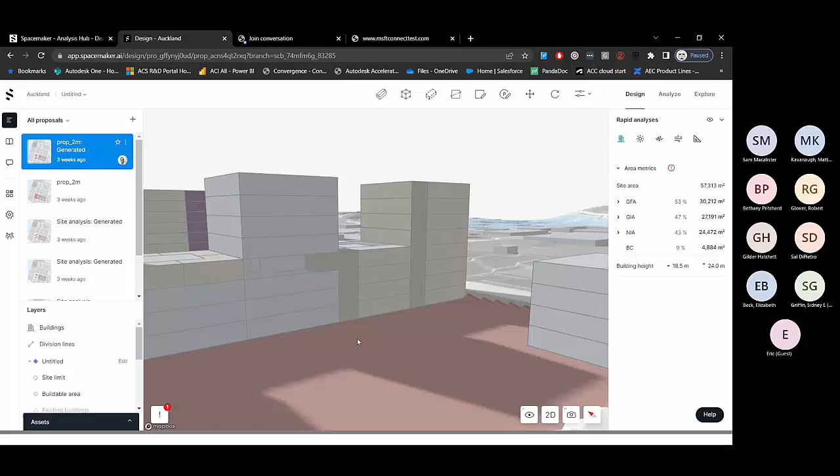If you want to be more detailed about this, I can convert this particular element to a polygon building, and if I'm wanting to be a bit more creative, maybe get into a Bjarke Ingels type style, I can start to do interesting things with geometry and have them hover around in bits and pieces.

So there's all these interesting things you can start to do with that, and I can get into more detail here by pushing and pulling the geometry around. So this is a great tool. Again, it doesn't go into as much detail as FormIt, but using the massing information here, it will go into Revit in a lot more of a cleaner way. So I just wanted to show that tool. I'm going to jump back to the project we have here, just with the buildings that we have.

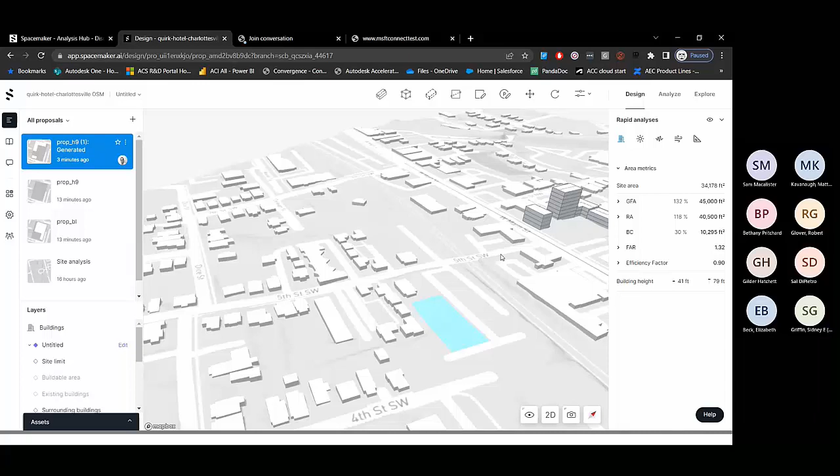Okay, so I've got a simple massing object here. I won't go into everything, I just want to show how this looks like in Revit. So what I'm going to do now with this design is send to Revit, and again, this is beta technology.

Let me just see if I can fire up one that I've done before. And do I have one recently? No, okay. So just while that's doing it, I'll jump into another model which has a little bit more detail in it, and I will do my best to grab a smaller model so it doesn't take too much time when doing it live.

So I think I did one here in Christchurch, New Zealand, when I was having a look around over there, and this is actually a much smaller site. Again, using the tools to do the AI for the layout, and for this particular one, we've got some more detail in our apartment units. So let's see.

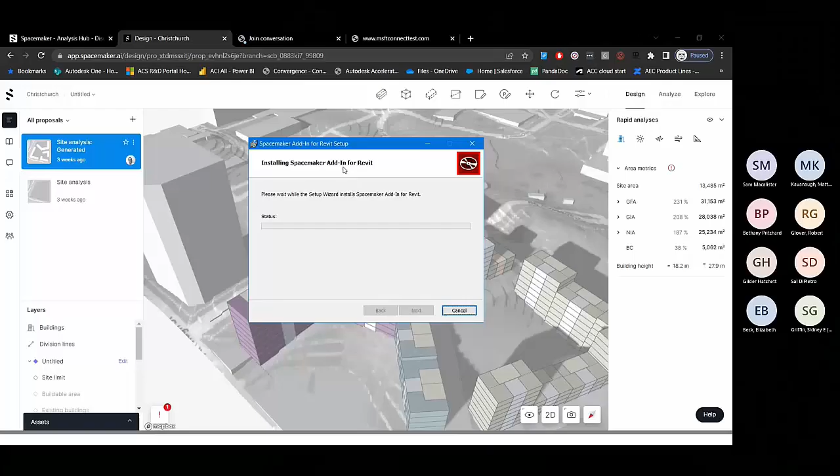Okay, all right, I'm going to see if it just works anyway. If not, we may have to do this as another session. But basically, with this tool, you can fetch that information and it will open up. I will see if I can open up one that I have done for the team in Singapore, and if I can't find it, then I may have to come back to it. It looks like my thing isn't downloading.

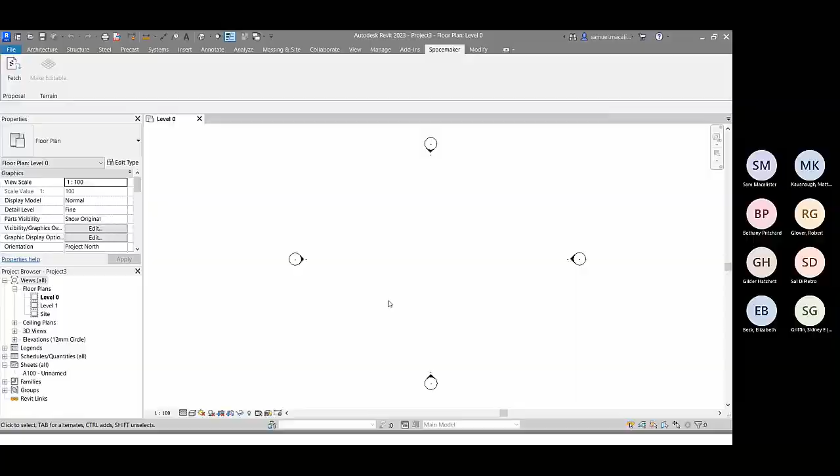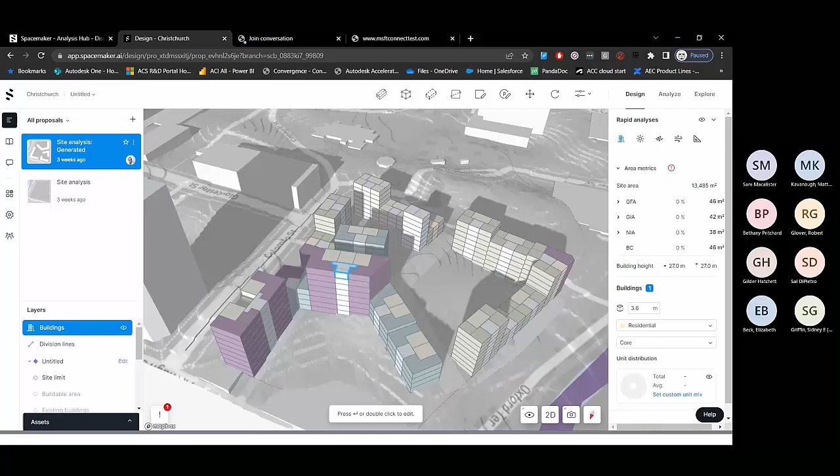So this is something that is going to make our lives as designers a lot easier, because we're going to have a conceptual design tool that has AI for doing different options for the site. It's going to be able to allow you to manipulate it in a lot more detail. At the moment, it's working more in LOD 100. And it's going to connect into Revit with detailed information for you to develop your information modeling project. So a lot is happening here, and you can start to use this for a trial, and we will eventually be rolling it out in your area. We just don't have the ETAs on that yet. So I'll just pause for questions on that one.

So you may not know the answer to this, but is it something that's going to be included in our AEC collections, or is it going to be separate? I do not know. I think at the moment it is sold separately, but I have no idea about what's happening with the future of that. I'm merely a minion in this.